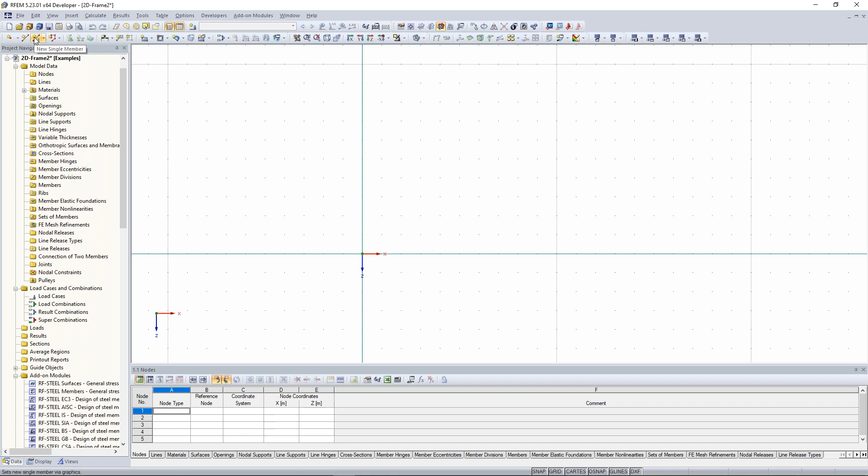First of all, I create my column. In order to create columns, you have to insert members. So I click here in the symbol bar, new single member. And because we haven't modeled or created one member yet, we have to create it again.

I click here, create new cross section for member start. It's useful to use this most common used cross-section here at this window, and we have to choose HEA profile. So in this case, this one. We click on that and choose here HEA profile 180.

We choose the right material. In this case, not S355, we want to have this in 235. So I have to modify this material. The best way to do that is to modify it directly, because then we've modified it and can use it the whole time.

So click here, edit material, and open here the material library. Choose here steel S235. It must not be at the standard group German, it can also be at the Eurocode - it has the same values, the same material properties, doesn't make a difference. So choose here steel S235.

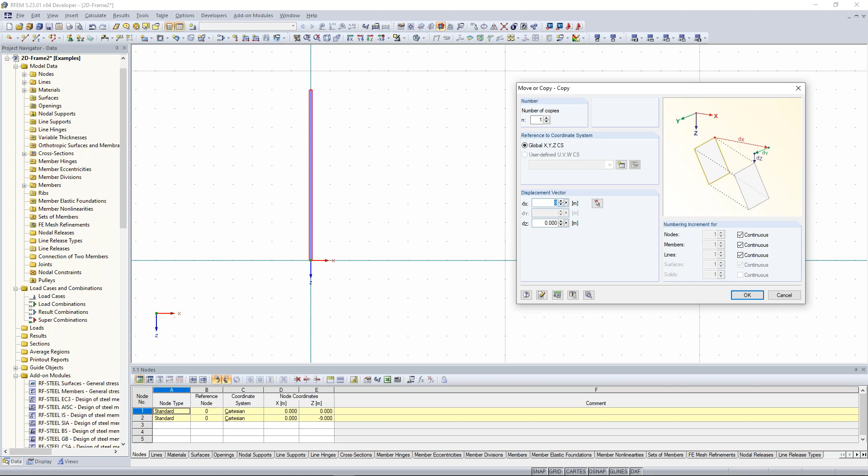Then right click, and now I want to show you the copy function. So I select this column here, right click, say move and copy, and the number of copies I set to at least more than 1 in order to copy that. My displacement vector is 9 meters - oh, 8 meters, sorry, now it's right. Okay, now I have 2 columns here.

Now the next thing is to create here the upper girder, the roof girder or roof beam. For that, I choose again new single member, and I create again a new profile, clicking here, creating new cross section. For that we need an IPE 270 profile.

So again, here we have these IPE profiles. If you don't find the wished profile, just open the cross-section library, for example here, and RFEM offers you a lot of different cross-sections. When you want to find the I-profile, click here, the I-sections, click on rolled and so on. I can do it this way, but also in the other way - now I'm here at this window, go here for IPE, and click here IPE 270.

If you want to see the different cross-section properties, the values, click here on the info button below cross-section, and now you see a lot of cross-section properties - shear area, cross-sectional area, also the moment of inertia you see, and so on.

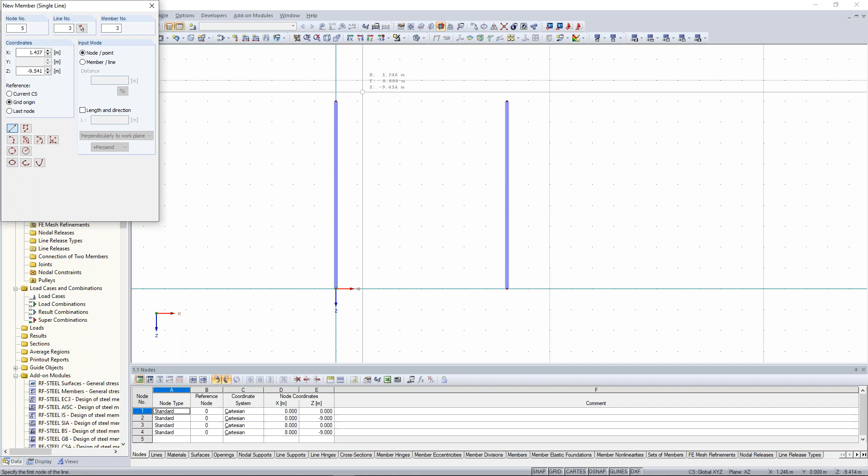Now, the next point is creating the slab beam here. We have also a slab beam or slab girder with another profile. First I want to create this cross section. I told you in the first online training that we have the possibility to create cross-section members, model data with the help of the data navigator, but also with the help of the tables.

Now I want to create the new cross-section with the help of the data navigator. I choose the data navigator, go to the area of cross-section, open this tree, and with a right click on cross-section, I say okay, new cross-section please. There I create a new cross-section, in this case again an IPE profile, but IPE 360. Click on OK, click again on OK, and now you see a new cross-section was added, and it's blue.

It has the color blue. What does it mean? When you have some model data here which is blue, this means that it isn't used in the model right now. But when we create a new member with that cross section, it will jump to black color because it is used for that model. You will see it.

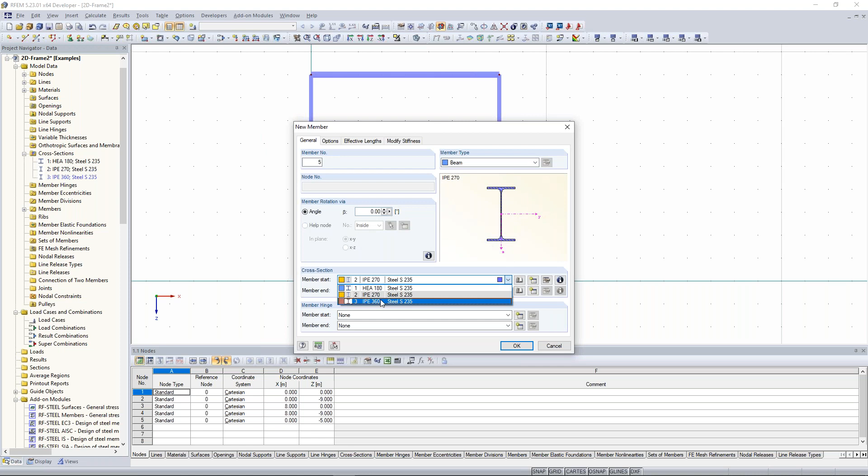Now I can easily create a new single member by clicking here at the symbol bar, new single member, and choose the right cross section I've created before. Click here IPE 360 and create that from that side to the other side.

Now we want to create again here a column. For that, I divide this member again. Click here, member number 5, and say divide member.

But this time we do it graphically. The big advantage of dividing graphically is that you can divide not just the member you clicked before, but also any other member. This is one advantage of dividing members graphically. Important is to choose the right steps, the delta steps. Now I go to this member here, which refers also to the member orientation, and here it's important that we divide this at the length of 4.5 meters.

So close this window. We have here this newly created node, and now we have the same cross-section column. I click here on that cross-section, on that column, and now I want to copy it by drag and drop.

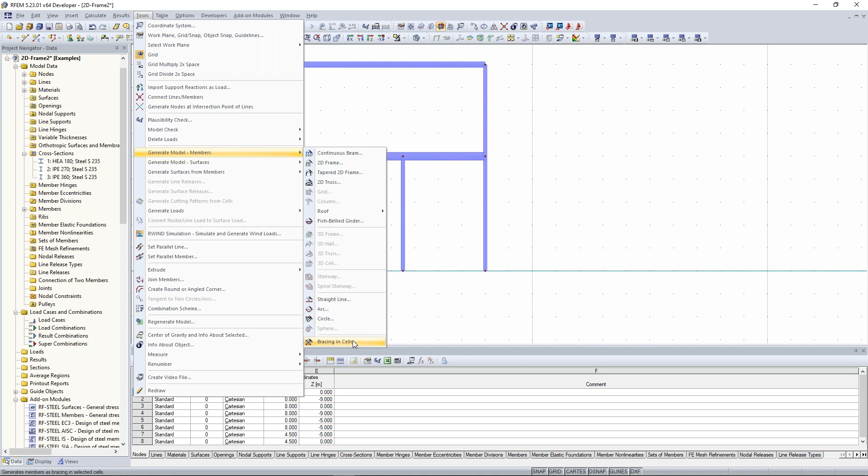Good, now almost done. Now we need here a bracing. We can do the bracings manually, or we use one of the functions of RFEM. You find many functions for creating or modeling something here in the menu bar. Under Tools, you find the function Generate Model Members, and at the bottom, Bracing in Cells. This is very useful for creating some models very fast.

In this case it's not so fast, but I want to show you this because you also have the possibility to create a lot of other things like continuous beams, 2D frames, and so on, or arcs, circles, and so on. But I decide to create a bracing in cell.

I click on that. Now, first of all, the bracing normally reacts just on tension. So if this member gets tension forces, it will react and transfer also the loads. But if the member gets compression forces, it will fail and this member wouldn't be calculated, and wouldn't have any impact on the structure. So it's important to choose the right member type, tension, and now also the right cross-section.

I create a new cross-section. We have a round steel here. Click on that, round steel.

And choose the right diameter, 20 millimeters. Click on OK. Click and again OK, and now we have the right cross-section.

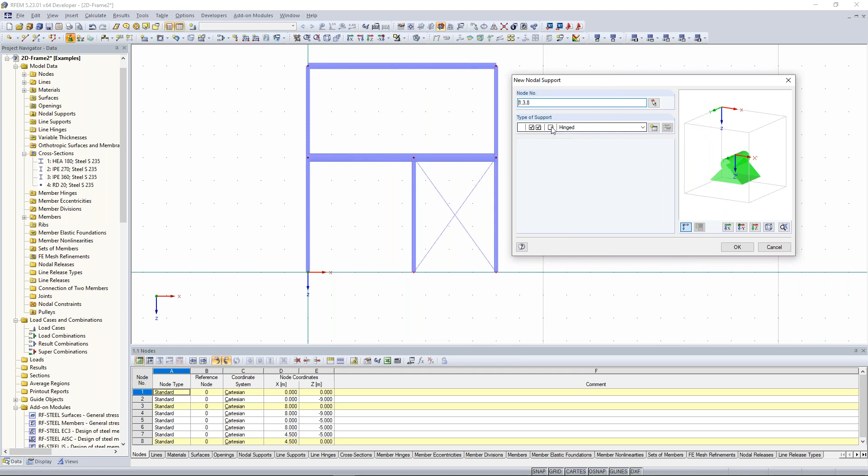Now we have to set our nodal supports. For that, I select these nodes here and say, okay, new nodal support. And because we are here at the 2D system, it's okay when we use here the hinged supports. I click on OK.

And finally, we have to do now our hinges because here I want a hinged joint, and the same way here also a hinged joint, and that column should be also a hinged column. So I have to create hinges, and for creating hinges I refer also to my data navigator. So I go here again to the data navigator and I say, okay, member hinges. I click here with the right click, member hinges, and say new member hinge.

And now this window opens, and let me explain to you what you have to do there. If you want to create a moment hinge, so no moments will be transferred to the other member, you have to activate here φY, so the hinge. If you want to create shear hinges or normal forces hinges, you have to activate the displacements here, UX and UZ.

So for that, we want to create a moment hinge. We have to activate here φY. You can do it also by clicking one of these shortcuts or icons here, set rotational release MY, and it has the same impact. For that I choose the φY, click on OK, and you see here now this member hinge was created, and it's again in blue, so it isn't set or it doesn't refer to any of these members.

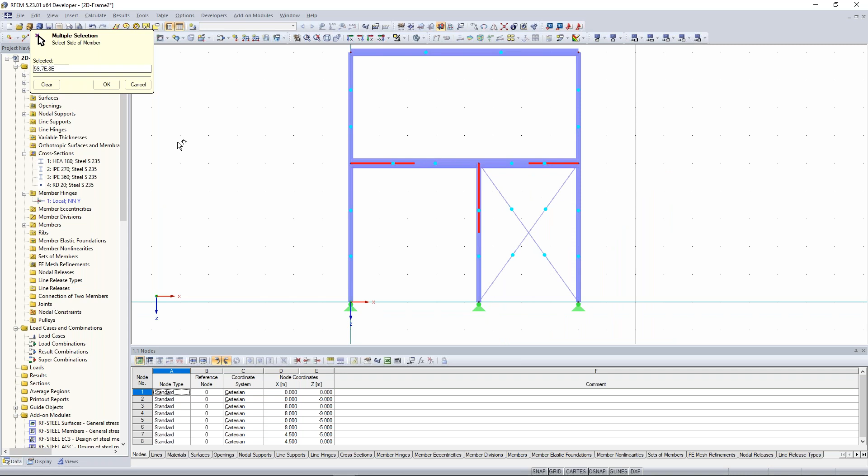I click on OK, and you see here these hinges. These are white points in my case, and these white nodes symbolize a hinge.

Good. Next thing. Daniel, sorry to interrupt. There are many people asking about the bracing, if you could show it again. Of course, no problem.

I create here on the left side on that cell the bracing again. So first of all, go here to Tools in the menu bar and say Generate Model Members. And at the bottom you find bracing in cells. And the reason maybe why you couldn't create this is because you didn't set the virtual line here. So you see now where the crosses are here. There it's possible to create a bracing.

Good. But here on the left bottom cell, you don't see the cross, and this is also the reason why we couldn't create there a cell. In order to do that, we have to create a virtual line in order to close this rectangle by members in order to get a cell.

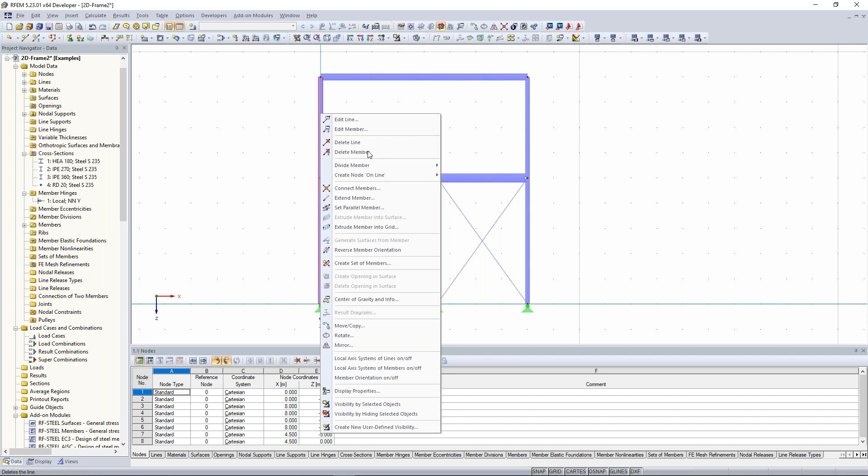And for that, I click on both members, add the upper member also to my selection by pressing the Control key. And then with the right click, I can say, okay, create set of members. And here I can give the name. In this case, I say the column should be continuous members. And I click on OK.

And when I change the display model a little bit to the wireframe model here in the symbol bar, you see here this set of members. And this is very helpful for adding loads there, for designing, for the interpretation of internal forces. I show you now the difference, because on the right side we have still these two members, and on the left side we have this set of members. And I leave it like that because I want to show you the differences.

Okay. So next point is the loading. So you add now some loads. In order to do that, we have to create a load case before. So click here on new load case at the symbol bar, and enter there a name. It's up to you. In my case, I choose the self-weight. I activate the self-weight. Click on OK. And now I add there some loads.

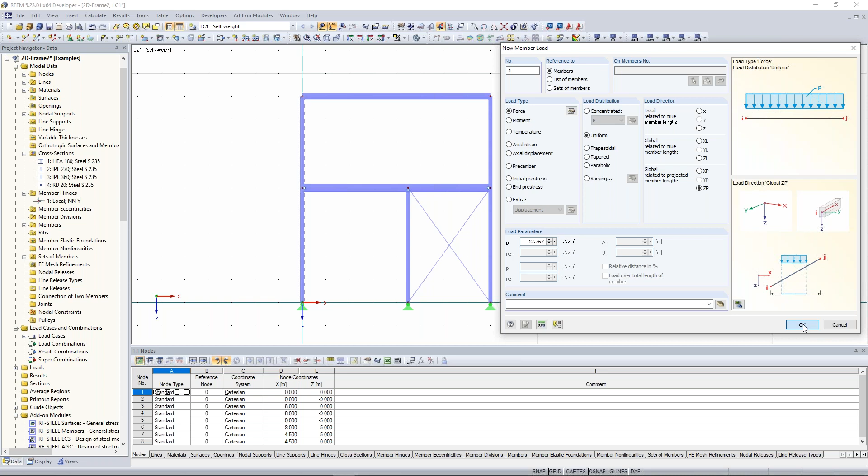I choose here this one and enter there a value of 12.767 kilonewton per meter. Click on OK, and I choose this girder here. Now I do the same for the slab beam here. Click again on these two members here, but they have the wrong value. So what can I do? I select this like that. And now you see, I have selected not only these columns, but also these bracings, nodes, and so on.

But that makes no difference for us because with the right click, I see the different selection options. And this is one big advantage of RFEM, that you can choose these model data or load data and edit them. So in that case, I choose these member loads, uniform, and say edit. And I change the load parameter from 12 to 68.371. I click on OK, and you see I just changed this member load and nothing else. Good.

Now I want to add some nodal forces. For that, I select these nodes at the top and say, okay, new nodal load. And because we selected these nodes before, you see here I have these nodes. I choose here a value of 40 kilonewton in the vertical direction. So I choose here PZ, click on OK.

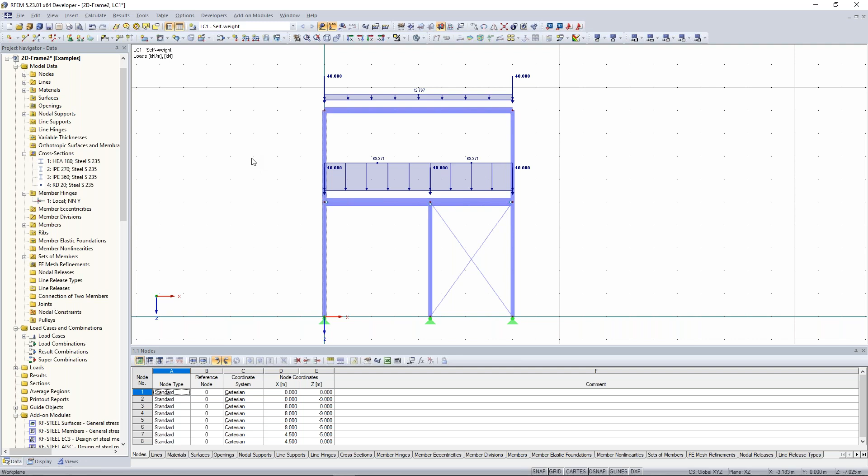And now I can easily copy these nodal forces also to the other level. So I click, for example, here at that node, and by copying via drag and drop, I can copy that very fast. So there are several options to insert these nodal loads. And now I select that again, right click again, and now not the member loads, but nodal loads, because I want to change the value. It's not 40 kilonewton, it's 2.4 kilonewton.

Okay, good. Next thing is the wind load or the horizontal load. And we created this set of members, so you can understand it as a combined member. And one thing is important: for sets of members, it isn't necessary to have the same cross-section. This set of members can have different cross-sections.

So when I want to create a set of members, it is possible to have a different cross-section here and a different cross-section here. So it's independent from that. Okay. Now see the difference. I create here again a new member load.

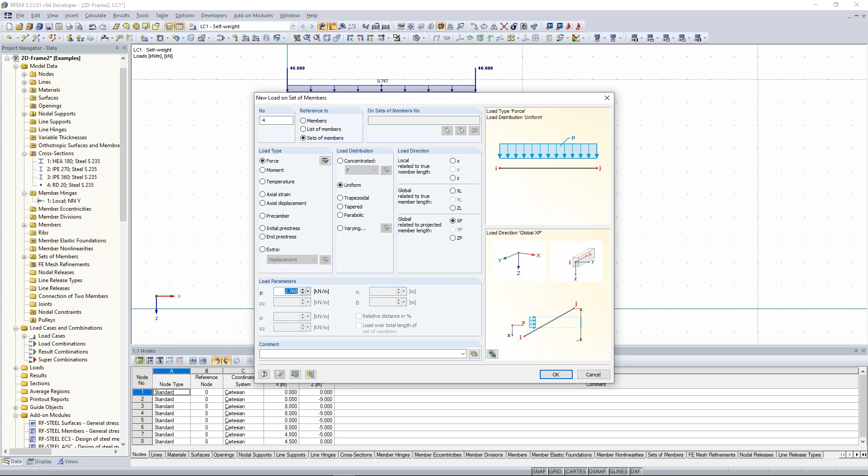But if I have here the set of members, adding this load will be an easier workflow because we are much faster. So click here, sets of members, change the value to 2.7. And now see, just by clicking one of these sets of members, I created the whole load along this column. This is very helpful and useful, because sets of members offer you more advantages, like adding loads, also when you design something.

And now we can also see it in the view of internal forces. Okay, now we added everything and we can calculate it. So you can click here, calculate all, or click here, show results. And first of all, we see here the deformation.

If we want to display the deformation in a nicer way, go to the display navigator, go down to the results, to the area of deformation, members, and choose that the cross section should have a colored deformation, and you see it like here. You can maybe also deactivate the isobands, the separation lines, and now it looks a little bit nicer. This is one tip, one of my secrets to show it a little bit nicer.

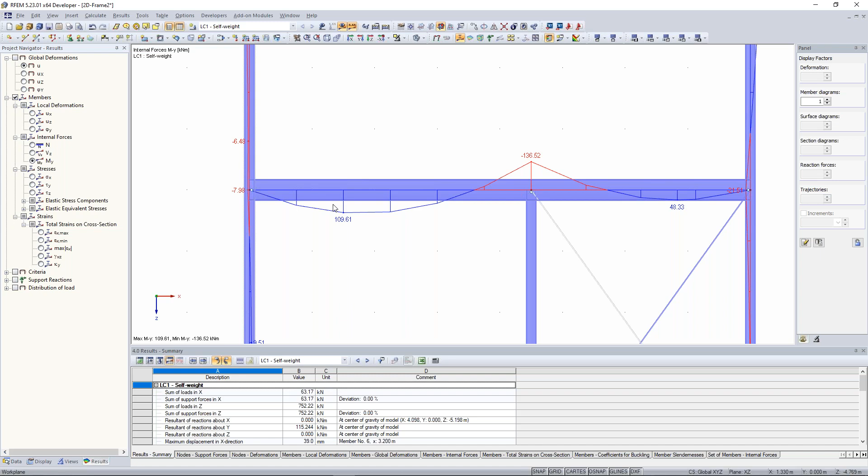And then let's go to the internal forces. For that, we have to activate the members here. What I want to show you first is the bending moments. I think that's pretty clear, because there we have a hinged joint, so there shouldn't be any bending moment. When we look at the normal forces, it's also pretty clear that we have some normal forces in the columns. And now look at the bracing here. Why don't we see any normal force at this member?

Because when we look back at the deformation, we see it is in the global X direction, so we have horizontal deformation. This bracing member becomes longer, so it will get tension forces, and this member will get compression forces because it becomes shorter. And when a tension member gets compression forces, it fails and will not be considered in the calculation. That's the reason why there isn't any value of internal forces.

And here we see this member has positive values; positive normal forces are tension forces. I think that should be clear now. Okay, again, one important point is the member type. I double click on one member, and we have here different member types. The member type beam is the standard member type for creating these structures. It can transfer all internal forces: normal forces, shear forces, and also bending moments. So it's a bending resistant beam.

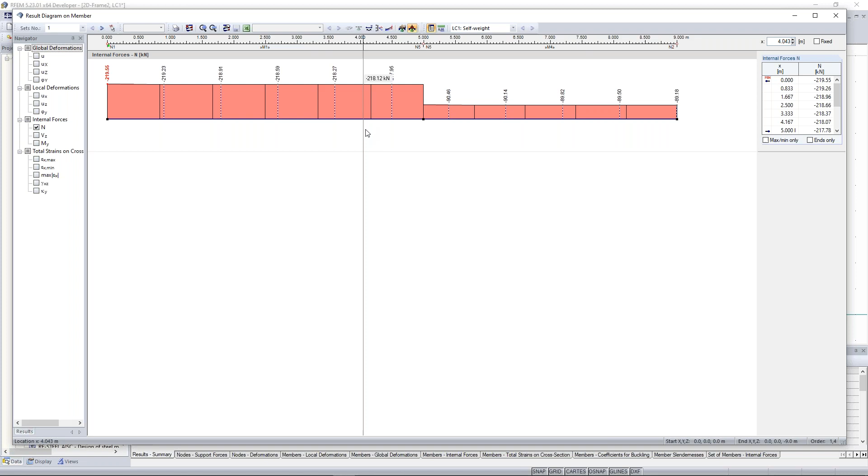This is very helpful, very useful, because when I want to have the same on the right side of my structure, I have to click every single member and then right click and say, okay, now result diagram. And now I have the same effect, the same situation, but I have to click every single member in order to have the same situation like on the left side, where I just click this set of members and say result diagram.

Okay, I think that we have everything concerning this. And now I would say we have time for questions. Praxitalis, are there any questions? Only one, Daniel. Someone is asking what's the difference between truss and truss only N, only normal forces, in the member type option.

Okay, I can show you the difference. First of all, I show you with the help of the cables. I think that's the best way to do that. So look, the bracing has the member type tension, but you have also the possibility to have truss and truss only normal forces. A truss can have along its member bending moments, but only at the ends there are no bending moments.

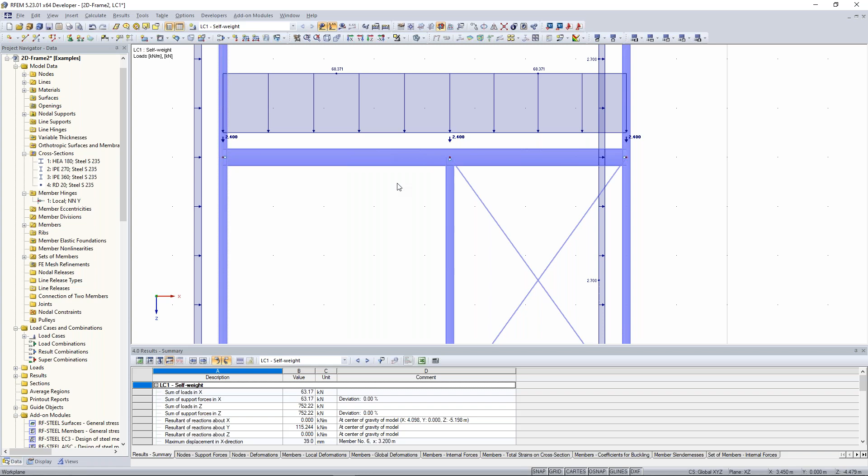So when you look, I create here a rigid joint, so I delete this member hinge, but I create here a single beam with hinge joints. So in order to create that, I create here at the member end again a hinge, and now it's a single beam. You have no bending moments there. You will see it now for this member, just for this member. Look to the bending moments, and I think that field moment is very clear.

At both ends we have hinges, and that's also the reason why we get there no negative bending moments. And the same situation you can create also with the member type truss. With the member type truss, the adding of member hinges is blocked, because at both ends you have hinges. Now look to the internal forces of the bending moments. Same situation, same effect. I think that's also clear.

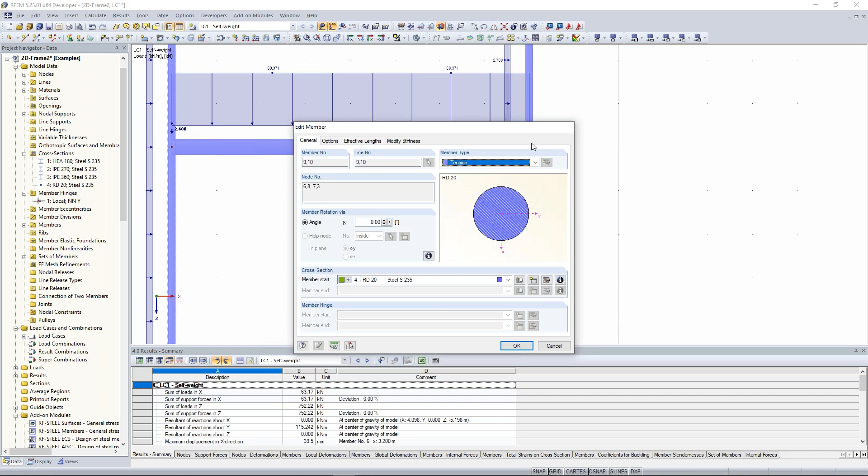And now I want to show you with the truss. So for that, I choose here these two bracings, say edit, and truss only normal forces. Now I think the better way to show you is when I activate this at the columns. So look to the bending moments, and when you look to the columns, you see there are some bending moments. And when you want to just transfer normal forces, only normal forces, click on that column, create here truss only normal forces.

So the program will calculate that column so that it will get just normal forces. But these forces can be positive and negative, so you can get compression or tension forces, but nothing else. I calculate it. And you see no bending moments. At the calculation before we had some bending moments, but now there are only normal forces. And this is the difference concerning these member types. Okay. Another question?

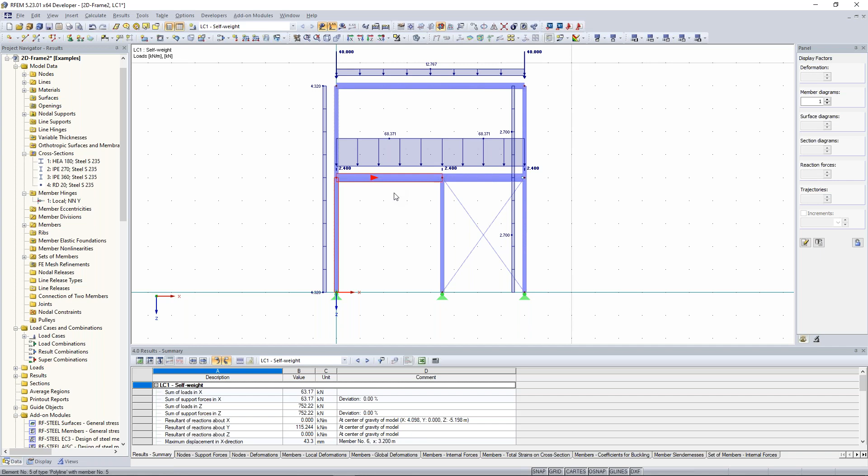Can you please explain how we can calculate the buckling length when making the unit checks using a stability module? Yeah. So this is the next thing, making a buckling analysis. So for that, I change these again to normal beam here. Change this beam again to the beam, and the member start a hinge. Okay, now we have the situation before, and now we can do the buckling analysis.

So for that, I click here at RF-STABILITY. I consider 4 eigenvalues, so 4 buckling cases. I refer to my self-weight load case. I just have to activate my division for straight members, at least 10. So the minimum number of member divisions should be 10. It's up to you, but more than 2 definitely. And the other settings, you can leave like that. Calculate it.

And now you see the critical load factors, so the factor by which you have to multiply the whole loading in order to get an instability. But we want to show the eigenvectors. And here we see it. Normally the first eigenvector should be there, but I can say why this eigenvector is like that. Because there is a column, and this is a rigid joint here because we have no hinge.

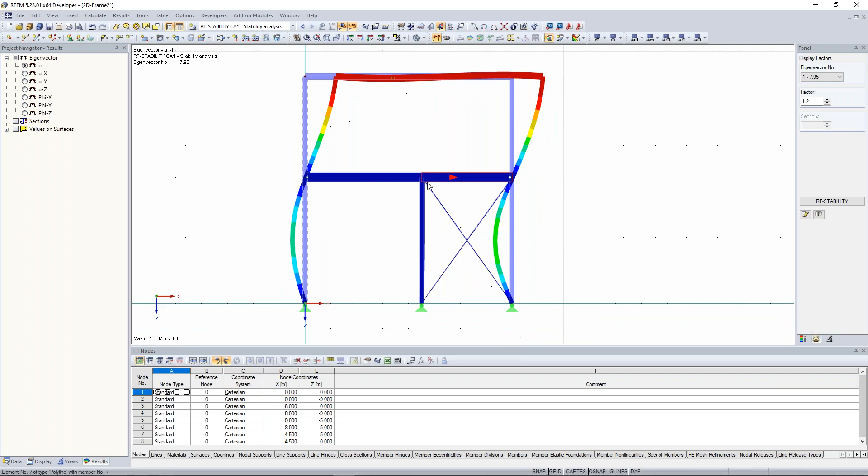I change this now, I make here a hinge, and now keep that eigenvector as first buckling case in mind. I create here, wait a moment, here a hinge, and calculate everything again.

And now it's better. So the first buckling case here is this column. So we have here the second Euler case. And this is a local buckling case or a local failing, because you see, okay, just this column will fail at the eigenvector or the critical load factor of 5.81. And then the second will be a global failing.

And to look at the buckling lengths or critical lengths, effective lengths, click here. And here you see the critical lengths of this. And when we look maybe at member number 8, there we should have a member length of the same length like this one. Look here, member number 8.

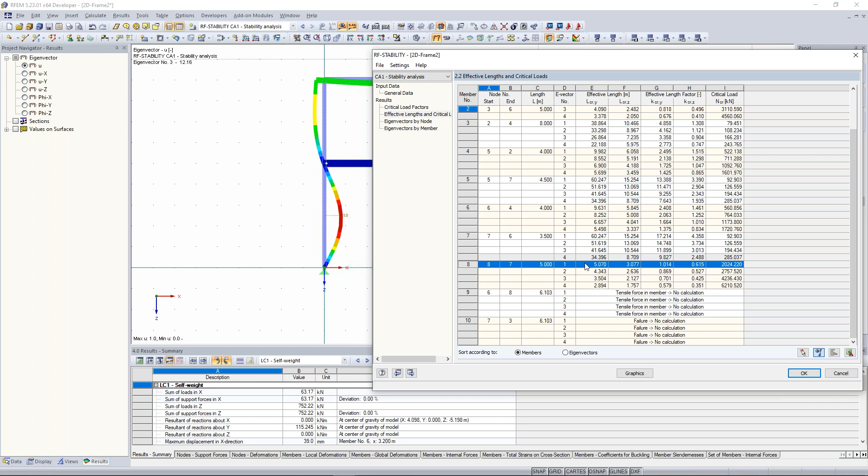We have here for the first eigenvector the effective length factor 1, and this is also similar to the Euler case 2, and this length will be multiplied by the normal length here, and we get a value of 5.07 meters. This is the effective length, so the buckling length. Okay, good.

Next question. Is there a way to determine what is the right cross-section of a member through the RFEM software? How you can choose sizes, etc. So as far as I understand, this question is about the design practically. Yeah, I think so too. So you want to prove if this cross-section is enough for the whole loading. In order to do that, you have to do some designs, and we can do a simple design, for example.

We make a very easy design. We make a stress design here at that beam. So look at the results, look at the bending moments. So we have here these normal forces, this bending moment, and so on. We make a very easy design. For that, you have to use one of our add-on modules.

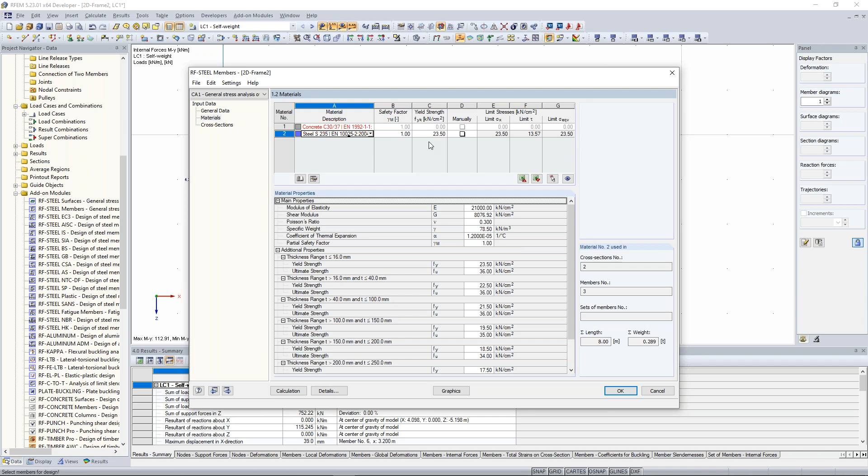I refer to that member here. Click on OK. Choose this load case here. Now I can check here the right material and the cross section. And here you have the possibility after the calculation also to optimize the cross section. And I have here this cross section IPE 270. I calculate it, and you will see the stress ratio is okay.

So we have a value here of 0.64, and that's okay. So I can go back to cross section, the maximum design ratio is 0.64, and I can optimize it. So the cross section will be optimized, therefore the optimized section from the table will be used. So we can get a smaller IPE profile.

Click again on calculation. Now we have another stress ratio. It's much more than before because it refers to the optimized cross section, and in this case it's the IPE 240 profile. And this is maybe a way to optimize or to get the right cross section for that case. Okay.

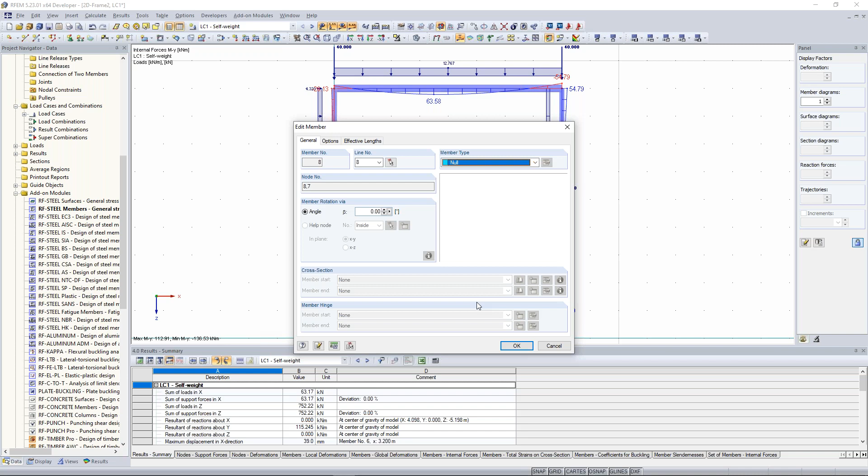Another question, maybe the last question of this chapter. What are null members? Null elements, sorry. These null elements are members without any rigidity, so without any stiffness. It's just for when you want to model something in an easier way, and when you don't want to have any impact on the calculation, you can use these members.

So for example, I can create here this null type. This beam will look like that. And then I would, for example, have a closed cell. This is maybe one option. Or when you want to add a surface load on members and you want to cover the whole rectangle, you can use these null members.

So the null members are maybe one way to model something when you don't want to have any impact on the structure. These member types don't have any stiffness, just for easier modeling. Okay.

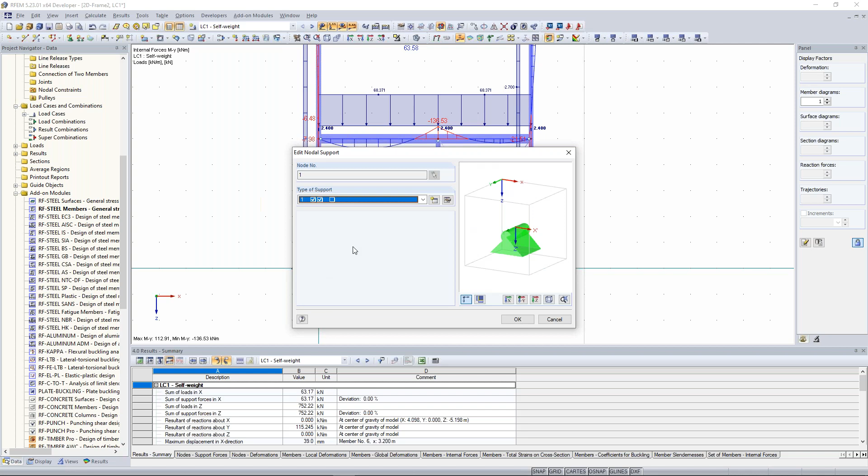I can show it here again. So I click here on one of these supports. When I added this type of nodal support, you see here some displacement and some resistance. So here the supports and the restraints are greyed out, and that's because we are using this 2D system, and that's why some deformation and rotations are partially blocked. Good.

So last question of this chapter is this one. Okay, good, I close this window and show you the results. What are sets of members? They must be understood as combined members, because the set of members doesn't depend on the same cross-section. So you can have different cross-sections and still use that as a set of members.

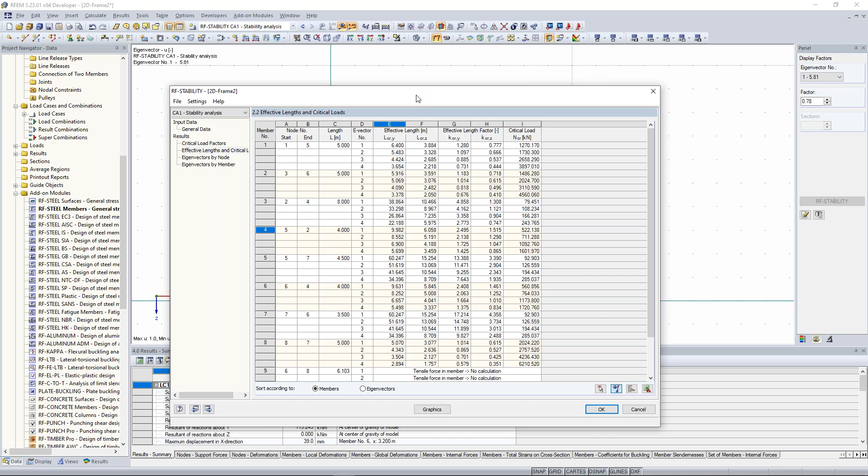Almost 10 meters, yeah, and this is important. Sorry, not 10 meters, because you also have to refer to the right eigenvalue, eigenvector, and this is the second form - for that you would have to use the second form here. So member 4, eigenvector number 2, and there you would have this effective length of 8.5 meters.

And the effective length isn't the same as the buckling - okay sorry, the effective length is the same, yes, of course. The buckling length is the same as the effective length. There are several expressions for that - effective length is the same as the buckling length.

Okay, good. Now we jump to our next project. For that, we create again a new model. Enter the name, concrete model, and refer to a 3D model. I choose the right project name and save it to the right folder - it's up to you where you save it.

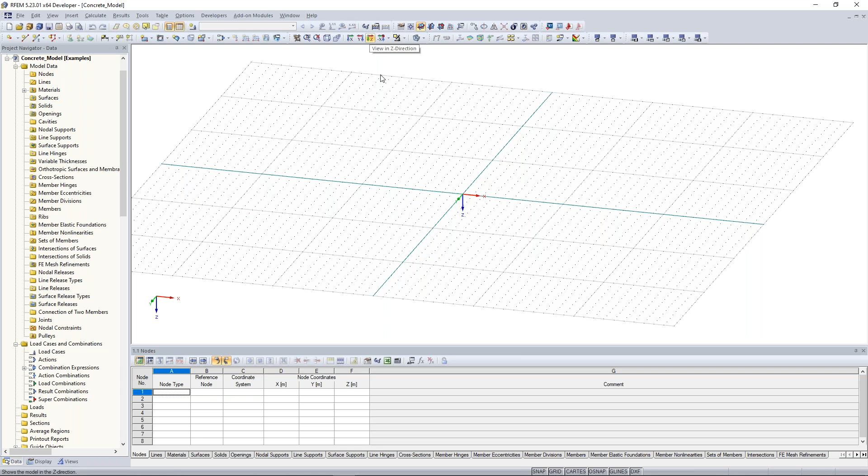In order to enter or insert the nodes very easily, I would recommend you now to use the tables, okay? So I jump back to the view in Z direction in order to have my window like that.

Now I insert several nodes via the tables. It's very easy when you have the coordinates in order to do that. Just click here at nodes, click on one cell, refer to the origin point, then jump from one cell to the other with the tab key on your keyboard, and enter for X for the first node 0, 0, 0. Then click enter, and it will jump to the next row to create the next node. For that we create 14, 0, 0.

Next node will be 0, minus 12, 0. And the other node will be 14, minus 12, 0. Now we have these 4 nodes, and with the help of them we can easily create one rectangular surface. Now, one last node I create. This will have the coordinates 0.5, minus 0.5, and 0.

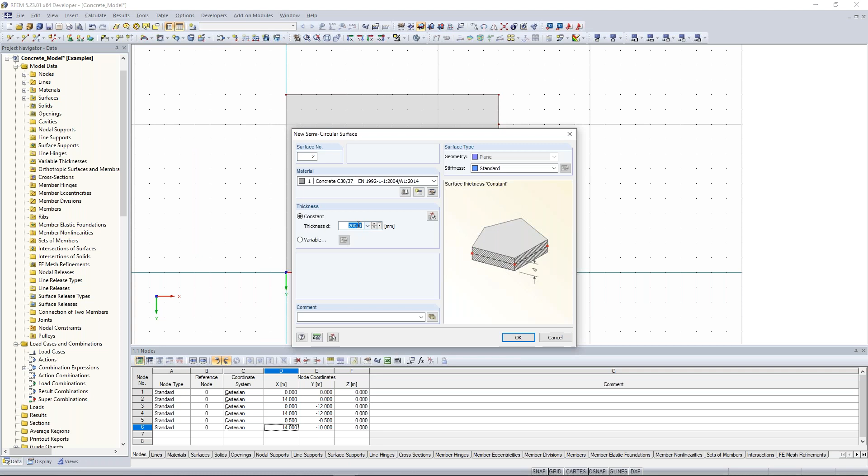Now the next step is that we create this semicircular surface. For that, go to the new rectangular surface, click on the arrow, then you have a choice of several forms of surfaces. Here, choose semicircle. Choose also the right thickness, click on OK, click on the radius, and go 2 meters down. And voila, we have this semicircular surface.

For the next things, we need to copy this node several times along this axis, and also copy it a little bit upwards. Click on that node, right click on move and copy, and say the number of copies should be 2 with a displacement vector of 5. Click on OK. And the last node I want to copy again, but in this case only once, with the displacement vector of 3.

Now I want to copy these nodes again against the global Y direction, so I select every node. Important that you draw your selection window from the left to the right lower corner. Right click, say move and copy again. In this case also number of copies should be 1, and this displacement vector is minus 4.5. Now you select the third node from the left side, again move and copy, and there it should be 4 meters, minus 4.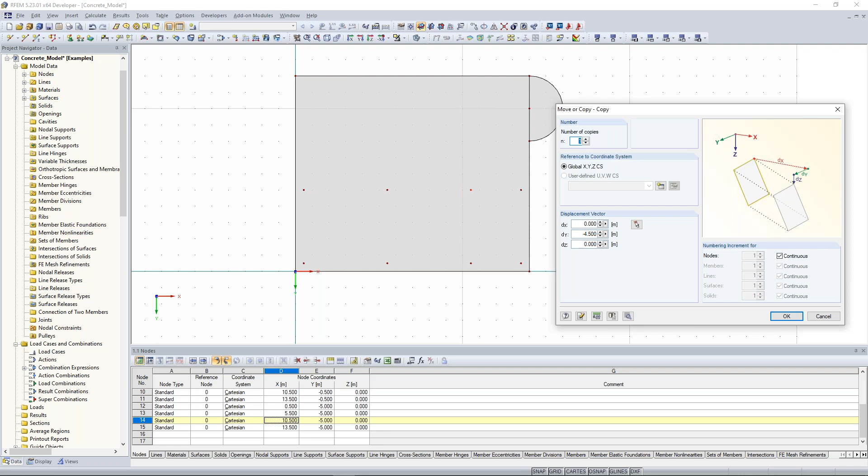Now we want to copy everything to the next level. So we draw a selection window over the whole structure, right click, say move and copy. Now number of copies should be 1, and against the positive Z direction, because we want to copy it to the next level, click here, enter the value of minus 3.25 meter. And now rotate your window with the help of the control key on your keyboard and your mouse wheel a little bit, and you have it like that.

Next point is creating the opening. So again, I show you the floor plan. Here we have an opening, here we have an opening, and I want to create it now. Keep in mind that creating an opening over two surfaces is not possible, so you can just create openings in one surface. For that, we have to delete these two surfaces. Click here on that line, click delete on your keyboard, or right click delete line, and the whole surface disappears.

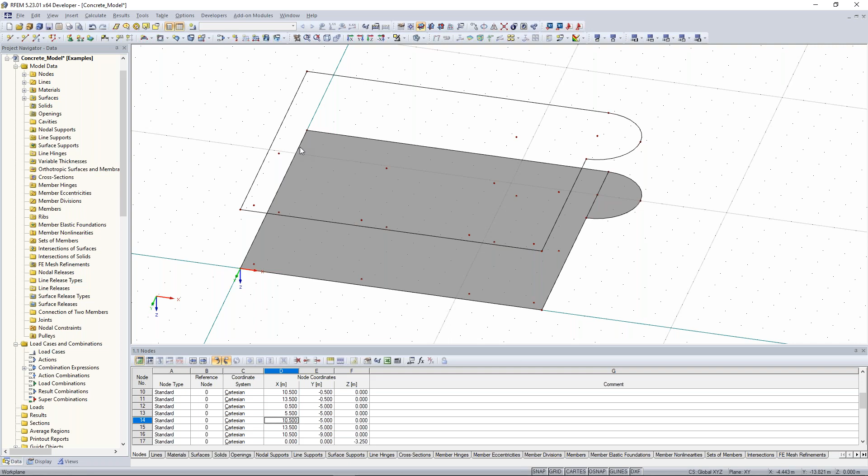But in order to create now one surface at once, we have the possibility again to create a surface with the help of the boundary lines. Select boundary lines, set the thickness to 300 millimeters, and click on one of these lines, and the concrete slab is generated.

Okay good, now we can create this opening very easily. Next to the creation or inserting of surfaces, you find the openings. Click here with the help of the arrow to circle, and click here to the middle point, and enter there a value of the radius of 1.8 meters. Click on apply, and then you have this opening here.

Okay good. The next step is creating the walls. The walls are also surfaces, and you can create a surface in RFEM when you have at least 3 lines, 3 boundary lines. So how can I do that?

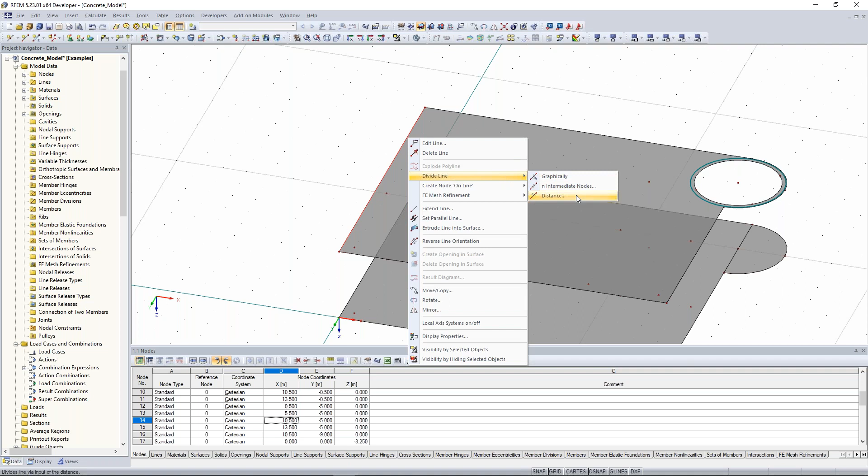So I click on one of these lines, in this case on the line on the left side. Right click and say divide line, in this case by distance. Now I look to my line orientation, and in this case it shows me from the top to the bottom. So I want to have it at the length of 3.5 meters, so the line start should be 3.5 meters. I click OK, and this node was generated.

And I do the same thing for the other lines here. I click on that line, right click on divide line, say also by distance, and now I refer to the line end. Here I enter the value of 5.5. Click OK.

And the same thing again with this line here. Right click, divide line, distance, line end is 3.5 meters. Okay good, and lastly this line here. Right click, divide line by distance, and here I divide the line at the end, 2 meters.

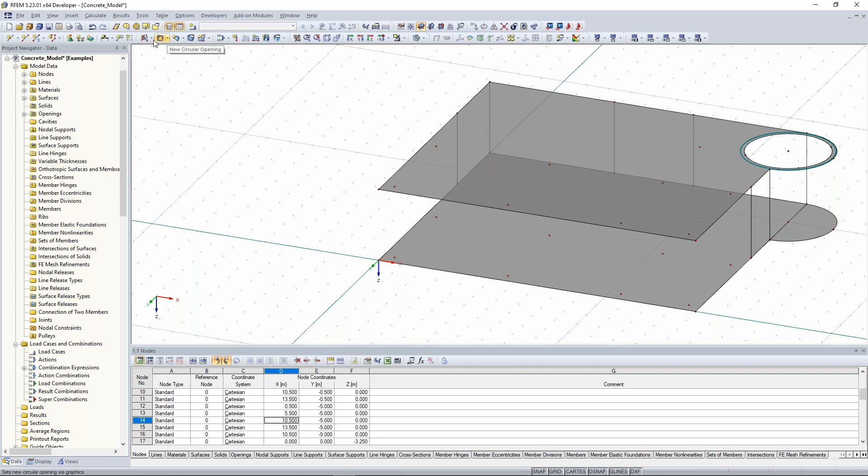Okay good, now I can create the walls. To do that, go here to the creation of rectangles, select boundary lines, enter there a value for the walls of 200 millimeters, and click these boundary lines. I think that's pretty clear.

The reason why I don't do any wall there is that at curved lines, plane surfaces aren't possible to create. So for that, you have to use another way to create a surface, because what we were doing until now was creating plane surfaces, and that's everything possible with that. But now you see here we have a semicircular surface, a curved line. For that we have to use something different, we have to use quadrangle.

You find it here in the symbol bar, quadrangle, and that's a general 4-sided surface. Click on that, also decide here for the thickness of 200 millimeters, and click these boundary lines.

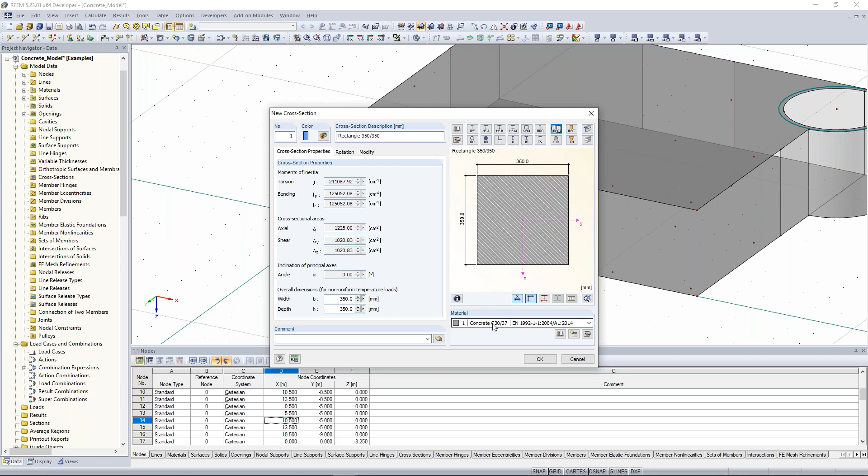Decide here for this rectangle concrete cross-section, and we have a quadratic cross-section of 350 to 350 millimeters. Click OK, and because we were referring to this concrete cross-section, the material was also set to concrete C30/37. Click OK again, and draw this member from the lower node to the upper node, and with the right click, close this insert window.

So now I want to show you again something very nice, the copy function via drag and drop. Select this member here, press the Control key, and move it from one node to the other node. I think that's pretty clear. Now rotate your window so that you can select all 4 columns by drawing the selection window from the right to the left side.

And now all columns were selected. And now press the Control key again, and you can copy it easily to the next node, to the next plane here. And then this node here, we want to create there again a column, create this here.

Okay. Now I have missed something. I have to add there an additional wall. So for that, I select this outer surface here, this outer wall. Again, press the Control key and copy it from there to there. Okay, good. I think we finished this chapter.

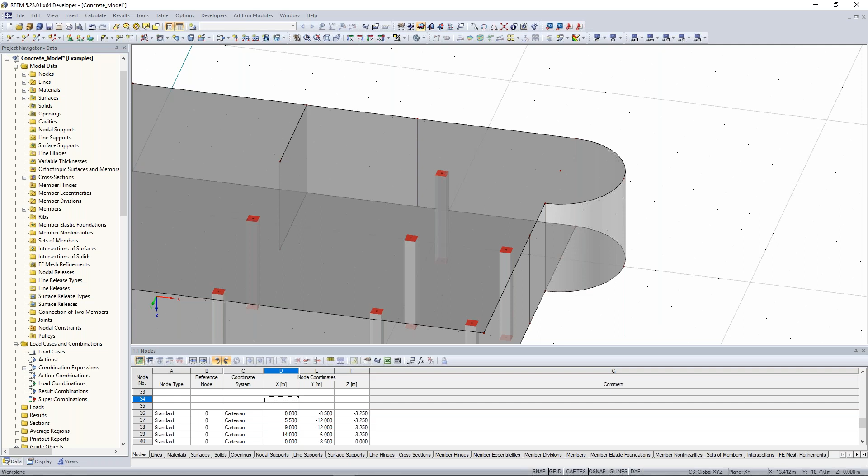So, okay, so I delete this opening. I delete also this line here. And as I said before, in order to create an opening, you have to do that at one surface. And before we had 2 surfaces, so I created here the whole surface. Now go to the symbol bar, click here on New Circular Opening. You find it here when you click on the arrow. Click here, Circle, and click here on the middle point.

And now you have the possibility to do it graphically, but because you are working with the wrong work plane, it will not be so easy to do that. So just enter the value of 1.8 meters, click the key Enter, and the opening was created.

Yeah? Okay, next question maybe. Okay, I think that was everything. You can carry on. That was everything? Okay. Yeah. We will have time at the end to answer maybe questions.

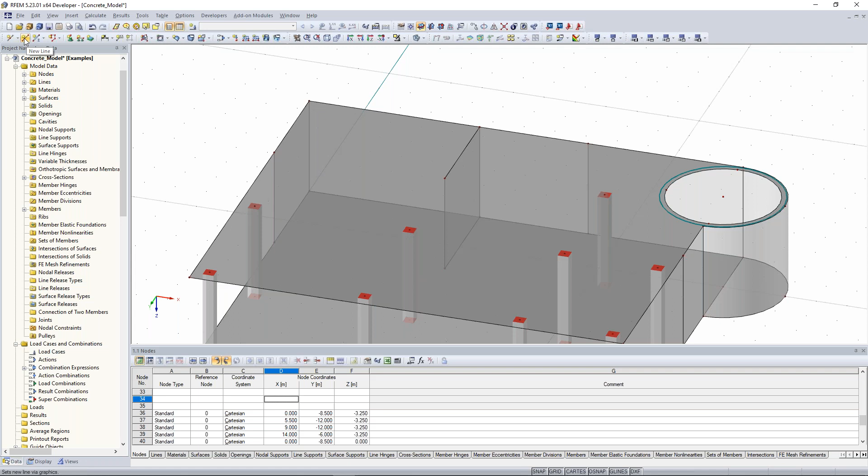So for that, we create here a new line in order to create our downstand beam. So I click here on new line, click from that node to that node and again to the column here. And now maybe you see this isn't a straight line. It's a little bit inclined. You see it here. And this is a mistake. I want to have here a straight line. So I can select everything on that node and move it to the same level here.

In order to do that, please press the Alt key on your keyboard, because when you want to select this within this surface here, it would not be possible because you would select also the surface. For that, please press the Alt key and draw a selection window from the left to the right side. Now when you rotate the whole thing, you see I selected the column, the member, and also the nodes.

And then say move and copy. And now say, select 2 points and define the displacement vector. Click on that node and on that node. And you see, we have a displacement vector of -5 in delta x and then also in delta y. But delta x, we don't want to have this, just in delta y. Click on OK.

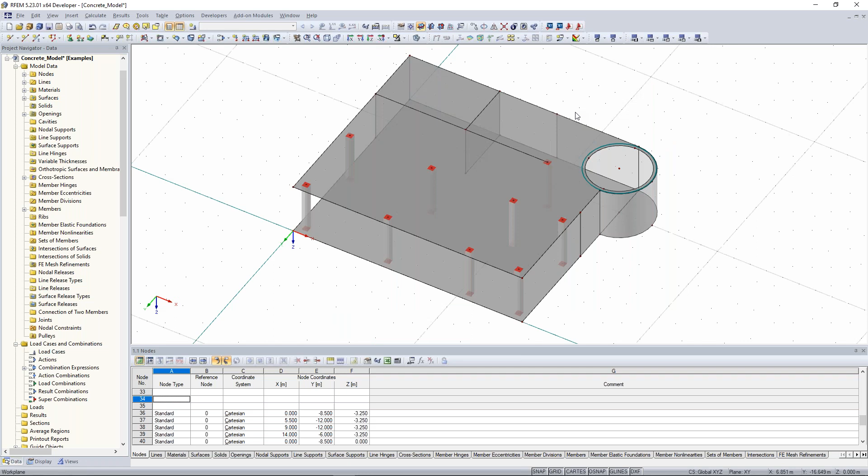And now I made the mistake that I copied it and not moved it. So I undo that by pressing Control and Z. Do that again. Move and copy and set the number of copies to 0. And now I have it right. Okay. Good. Sorry for that. But maybe it was a nice way to show you how you can change something afterwards.

Next thing is create the downstand beam. For that, please select this line, add to your selection also the next line with the help of the pressed Control key. Right click, say edit line. You see now here the line numbers we selected, go to the member tab and say member should be available. Okay. Now we create a new cross section, the cross section of the downstand beam.

Click here on rectangle. And we have a width of 200 millimeters and a height of 150 millimeters. Click on OK. Yeah, looks like that. Click on OK.

And now I think one of the most important things is when creating downstand beams or T-beams, please, really, please use the member type rib. Okay? So if you learn at least just one thing from this training, it should be that you use the member type rib for downstand beams. Okay? Go there, edit this member type,

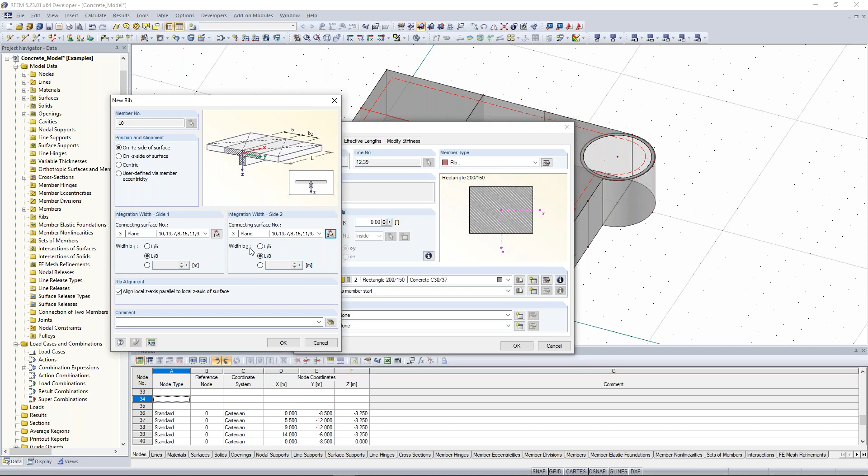I click on OK, again on OK. And now you see here this downstand beam. And you see there's an eccentricity, there's a joint, and you don't have to do that. I just want to show you: go to the display navigator, go to rendering, click here on model, solid model, surfaces, and choose filled, including edges.

You see it here. So the lower edge of the surface equals the upper edge of this downstand beam. So everything is right. It's also realistic. And this is one important thing to know when you create downstand beams.

Okay. Next thing is the creation of an opening in another work plane. I want to create an opening in this surface, this wall, because we want to create a window. You have to change your work plane, because now it isn't so easy to create an opening there, because you don't have the right work plane to refer to, so you have to change your origin.

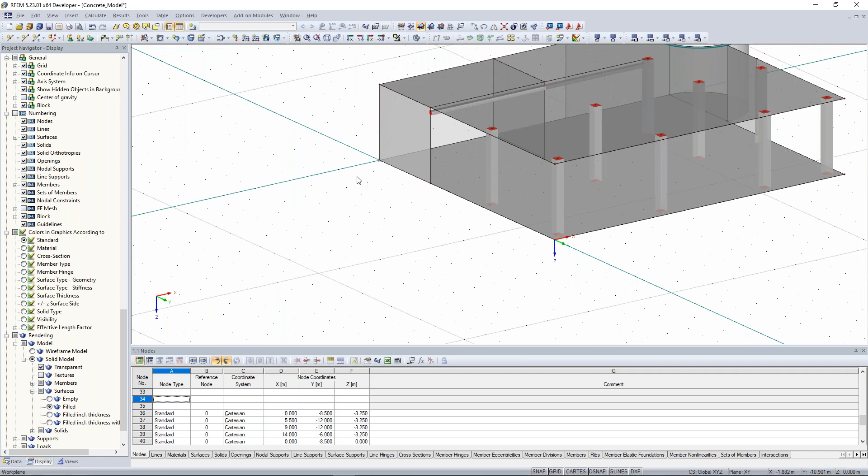So in order to do that, click here on Set Origin of Grid/Work Plane. Click on that and choose this corner node here, because then we are in the right work plane. We can change the work plane to XZ, so go here and choose work plane XZ. And now it's easier to create a window or an opening there.

Okay, so for that, you can use rectangle here, and now it's easier to create different openings there. But you see the grid points aren't so easy to snap to, and they are not at the right coordinates. So for that, I create my nodes. So I go here, click on data, click here on nodes, say create new node.

And now it's important that I refer to that point. Sorry, this was the wrong insertion of nodes. I think the best way to do that is go here to the toolbar, click on new node, and there refer to the Cartesian coordinate system.

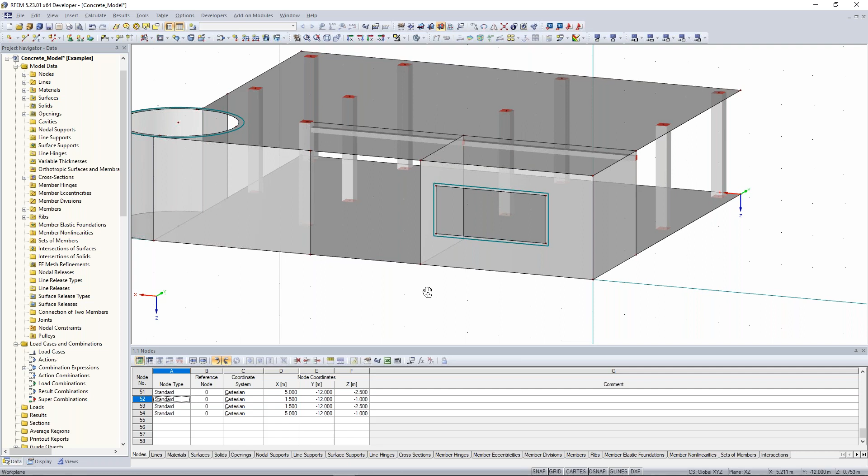And now you can easily create this opening. Click here on new rectangular opening, click on those two nodes, and you can easily create your window or your opening. This is one point you have to keep in mind. When you want to modify, edit, change, or create something on another plane, you have to change your origin of grid and work plane. Good. I change it back to my beginning situation.

Yeah, and now we have maybe again some time to answer some questions. Dr. Stellis, do you have some questions? No questions yet, Anil. Okay. So I go ahead.

So, good. I create now my surface supports, okay? Because we need some surface supports in order to hold this complete structure, and also some line supports in order to hold here these lines, because there we want to have a continuous foundation. Okay, first of all, the line support. For that, I choose the wished lines and say, okay, new line support.

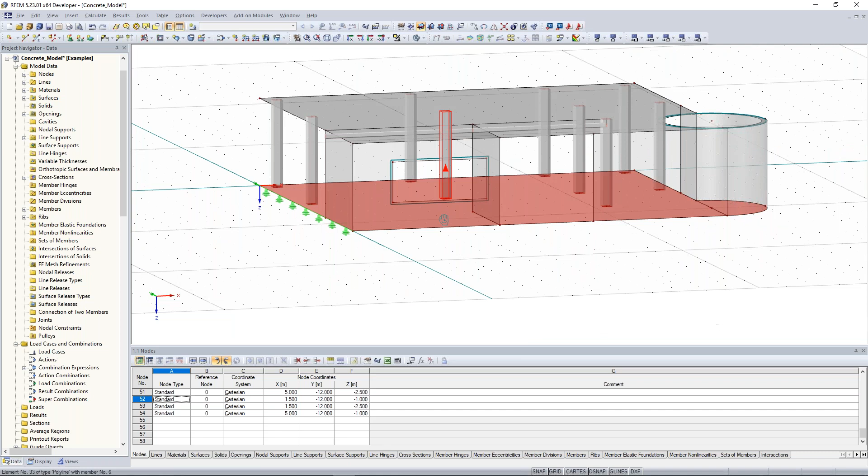For that, I rotate my window a little bit in order to select these surfaces here. So I click on that surface. I press the Control key and add to my selection this surface. Now, with the right click on that surface, I can say, okay, edit surface, go to the tab support and eccentricity, and say the support should be available.

And there we change, first of all, the units and decimal places, because we are referring to meganewton per meter to the power of 3. So click here on units and decimal places and enter there at support stiffness orthotropy the forces meganewton. Click on OK. These units will change. And now it's easier to enter the values, not so big.

So there are these kind of spring constants, 10, 10, 100. And for the shear, we have 50 and 50. We want to consider one non-linearity. In this case, the whole surfaces should fail if the contact stress in the Z direction is negative. So if it gets tension forces, no tension forces. So this option corresponds to failure under tension. Yeah, this is right. So if the slab is lifting, no more support is provided. Okay, this would mean this option here.

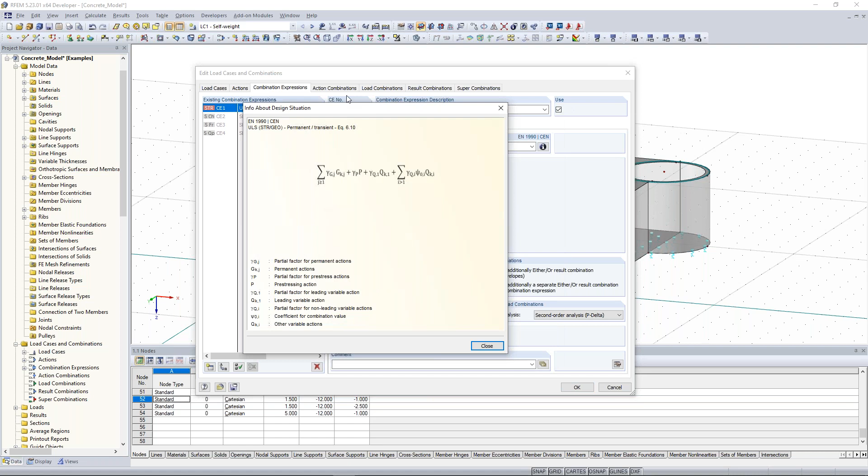So when I jump back to this ultimate limit state, I can see here the design situation. When I click on the Info button, I see the design situation and how load cases will be combined. So here, first of all, of course, these partial factors. Then here again, some partial factors. And when I have more than 2 load cases with different actings, I also have to consider this combination factor, the coefficient for combination value. This psi and this gamma here. The gamma is the partial factor and this psi is the coefficient for combination value.

Okay, I close this window. What I want to consider is the imperfection load cases. I have here these imperfection load cases, and I want them to be considered only with the right wind load cases. For that, I say, okay, all imperfection load cases as alternative. So no imperfections would combine with each other. They exclude each other, but I subject them to specific load cases.

I don't want the imperfection towards the positive x direction to be combined with the wind in the positive y direction, because this would be a little bit favorable for the whole calculation. And I know the most unfavorable situation will be if the imperfection towards the positive x direction is combined with the wind in the positive x direction. So I exclude them. The same I do for the positive x direction when I have the load case imperfection towards positive y.

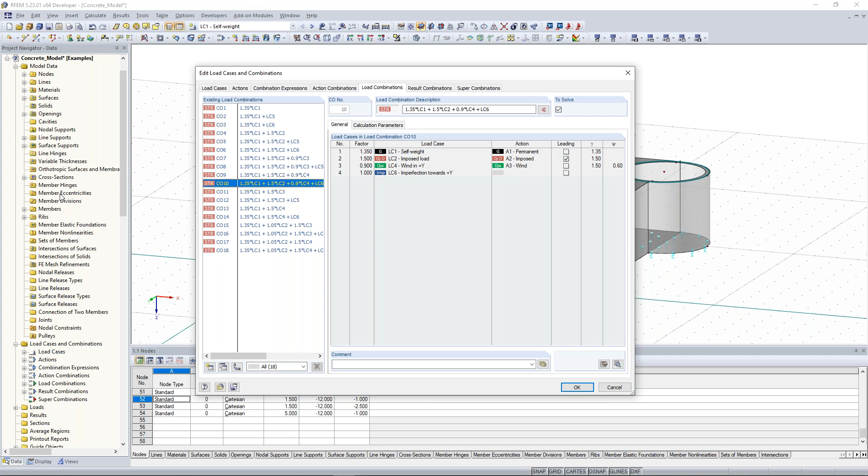Okay. Now I jump to the load combination. What is a load combination? A load combination is a combination of all load cases taking into consideration these partial factors and combination factors. We combine these load cases into one bigger load case. So when we jump to load combination 10, we see load case 1, load case 2, load case 4, and also load case 6, and here also the different partial factors and combination factors.

Okay. And then I jump to the result combinations. What is the difference between load combinations and result combinations? The result combination is a combination of all results as an enveloping result. So you can see the maximum and the minimum of internal forces or results in general. In a result combination, the maximum and minimum values of internal forces, deformations, support reactions, and so on are determined.

This is one big advantage, because here you have 18 different load combinations and you want to see the most unfavorable results. For that, the result combinations are very useful because they consider all load combinations and all their results. And there you can see the maximum and minimum of the results. Okay, good. So much for load cases, load combinations, and result combinations.

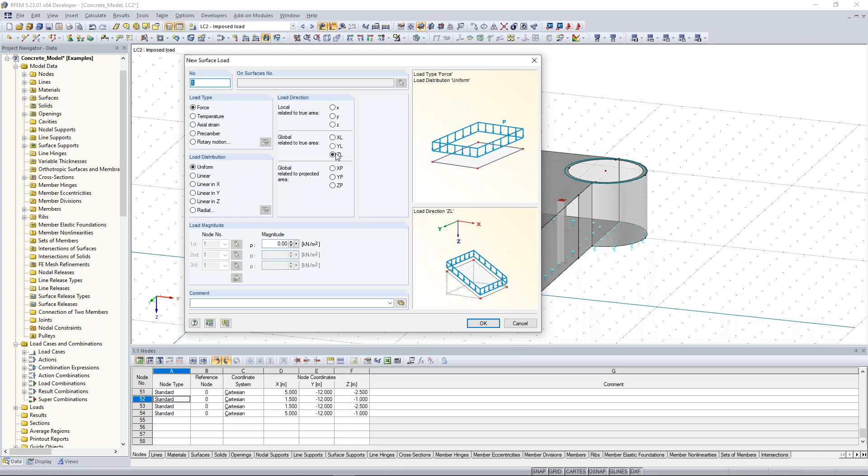For that, I go here and say create new surface load. I relate to my true area; the magnitude of my surface at the bottom is 5 kilonewton per square meter. I click OK. I made a mistake, unfortunately. Again, I click this surface here, and then I rotate my work window a little bit in order to click on that surface. And the same I do for the upper surface, but here I have to change the value from 5 to 2 kilonewton per square meter.

Okay, good. Now I jump to the next load case, load case 3, wind in positive X direction. So here I choose this wall, click on new surface load. Of course, I have to refer now to global related to projected area, and enter a value of 0.4 kilonewton per square meter for the pressure side. Now, important thing: I use line loads because I refer to the edges, the boundary lines of surfaces. There you can use line loads.

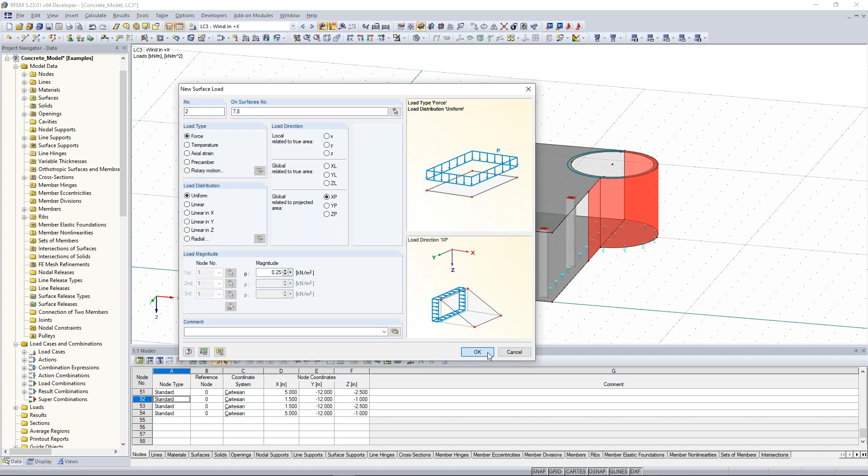And the same thing we are going to do for the right side. Here I choose again these two surfaces, click again on new surface load, and I relate to my projected area. For the suction side we have a lower value, in that case 0.25. And I click these two lines, create a line load, and enter a value of 0.41.

Okay, good. Now I jump to the next load case, the positive Y direction. For that I select all three surfaces here, click on new surface load, relate also to the projected area. For the pressure side we have a value of 0.4 kilonewton per square meter. Now I refer to these lines here, new line load, and also here 0.65 kilonewton per meter.

So now I made a mistake. The direction of the wind load is wrong. I click again on these two line loads, right click, edit line load. The direction of these line loads was wrong. I refer to related to true line length in the Y direction. Now it's right. So you see, it's no problem when you make some mistakes in the modeling or load entering; you can change it every time afterwards.

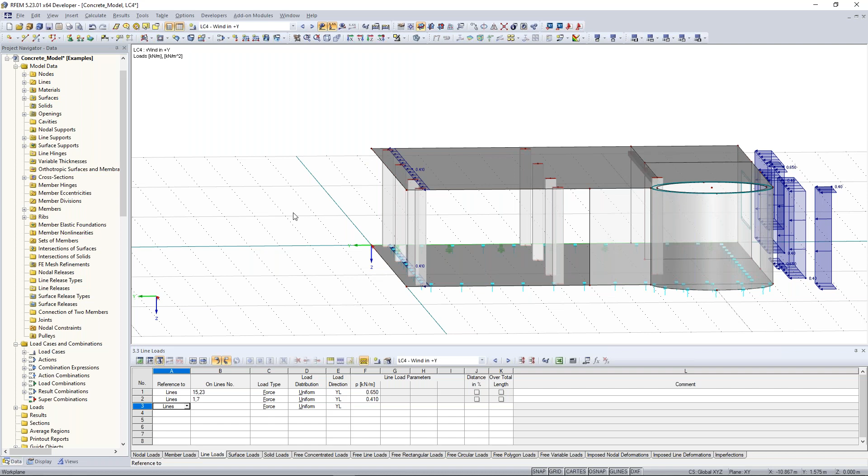So for the suction side, we create now this line load. We refer to lines and choose the lines graphically. Click this line and this line. Click on OK. Now the load direction and the load distribution is the same. The only thing we have to do is enter the right value, and for the suction side we have 0.41 kilonewton per meter. And you see we have now a line load. Very easy. Good.

Now, next thing, the insert of imperfections. First of all, I refer to my imperfection towards the positive X direction. In order to filter something, I can really recommend you to work with the Views Navigator. Click on the Views Navigator, and now you just want to see all columns. You can select every column and then say, show me the visibility by selected objects. This is one possibility, but there's an option where you can do it much faster.

Go to visibilities, activate members by cross-section, and activate just the rectangle 350-350. And now you see everything is shown by this visibility of these rectangles. Now you can easily select these columns.

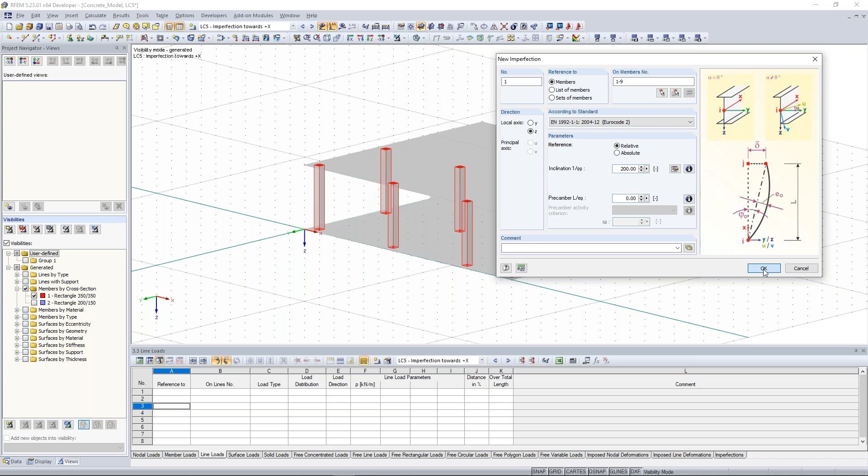You can activate the local axis of members by right-clicking on one of the members and selecting Local Axis. Now you see also the imperfection. I changed the visibility, the display model. Now we have this wireframe, and you see the imperfections a little bit better.

We do the same thing for load case 6, the imperfection of Y. Again, we select everything, click on Insert, Loads, Imperfections graphically, but in that case we refer the direction to Y. Click on OK, and we have here this imperfection.

Okay, good. Now almost everything is done. Let's refer a little bit to the FE mesh. In order to set some FE meshes, we learned in the first online training that we have here in the menu bar the possibility to do some FE mesh settings. Click on that.

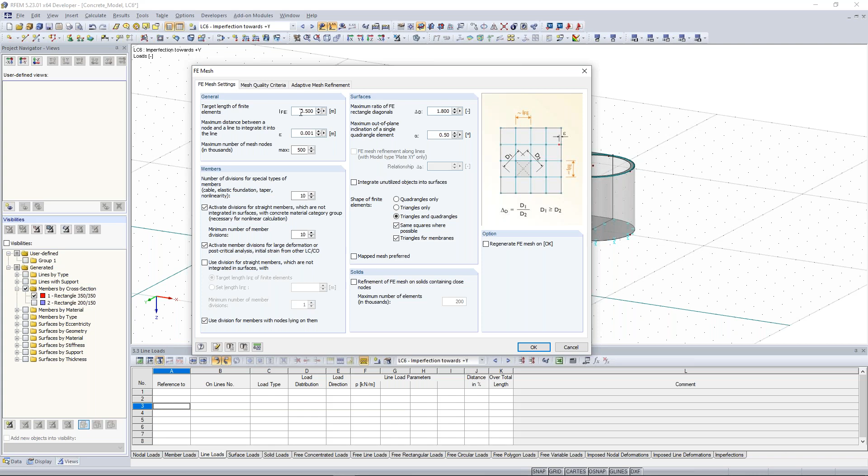Here we see the general target lengths of finite elements. It's okay when you use here 0.5 meters. You have to adapt this length of finite elements every time to your whole model. When you're modeling or designing joints with the help of FEM, you have to adapt the target length of finite elements and choose maybe a lower value, a finer mesh. It's up to you how to use that. I can really recommend leaving it like that, because the presettings are really good. Click on OK.

Now I want to create an FE mesh refinement here at that node, because sometimes the FE mesh should be modified in specific parts of the model. Those are critical areas such as corners of openings.

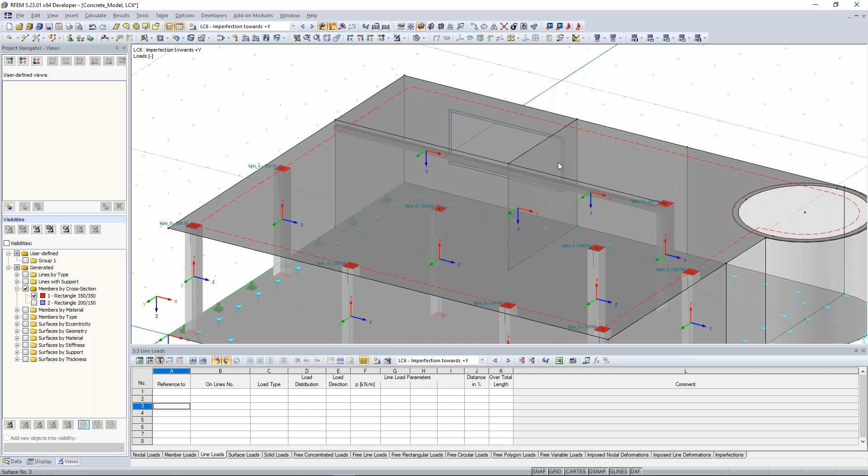For example here, we have corners of openings, or also areas with single loads, because there can be singularities there. And you want to avoid singularities as good as possible, because singularities are parts of a structure where you don't have good results.

For example, we make here an FE mesh refinement. Click on that node, right click, FE mesh refinement, and click New. Create a new FE mesh refinement and apply it to a node, circular. The radius should be 1.5 meters, and the inner and outer length of this FE mesh refinement should be 0.1 meter and 0.5 meter. Click on OK, click again on OK.

Now you see here this sphere or circle lines. And when I show the FE mesh, go to Calculate, click on Generate FE Mesh. And now, in order to see it a little bit better, click here to the wireframe. You see here the FE mesh generation.

The normal target FE length is 0.5 meter, which we set in the general FE mesh settings. And when we use the FE mesh refinement, you see here we made an FE mesh refinement, and the inner length is 0.1 meter, and it becomes bigger and bigger up to 0.5. It's up to you how to do that.

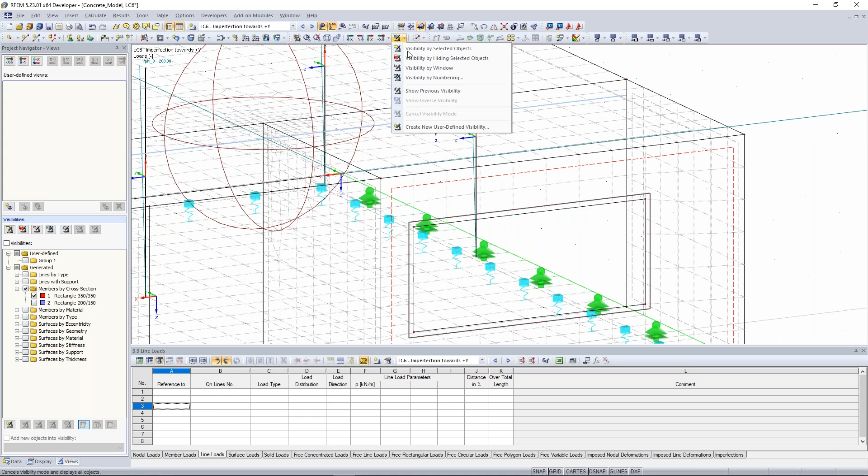For example, I learned it in that way that at least you need 4 FE elements in order to have good results at this surface. So when you want to interpret some internal forces or results, I don't know if 2 FE elements are enough to get good results.

It's up to you. So again, here at the corners, you will probably get singularities, because here you have just one FE element, and along one FE element the results are calculated. I don't know if you get good results there. So my recommendation would be that you do some FE mesh refinements.

Okay, good, so I cancel the visibility mode. Now everything is considered, in my opinion, and I can calculate the whole structure now. I go to Calculate, and I choose here the result combination, which is much faster than calculating every single load case and load combination. Click on OK, and the whole structure calculates.

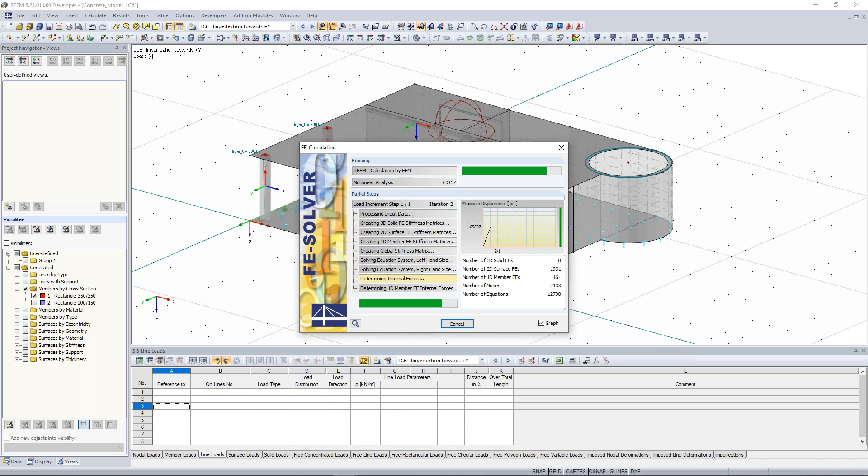Okay, now let's show the results. I jump to the result combination and click here on show results. The first thing we see is the deformation.

I think the deformation looks really nice, interesting. You have the possibility to see the deformation of the surfaces and also of the columns here. You see now we have this line deformation of the columns, of this member.

Go to the display navigator, activate deformation results, deformation cross-section colored, and you see here also the deformation of the cross sections.

Okay good. Next thing, members, the internal forces. Let's go to the downstand beam and compare the results.

These results look very good. So we have here field moments, also this negative moment above over this wall. By the plausibility check, I think this is okay.

Again, the normal forces of the columns - normal forces are pretty clear. Okay good, so now let's go to the surface forces.

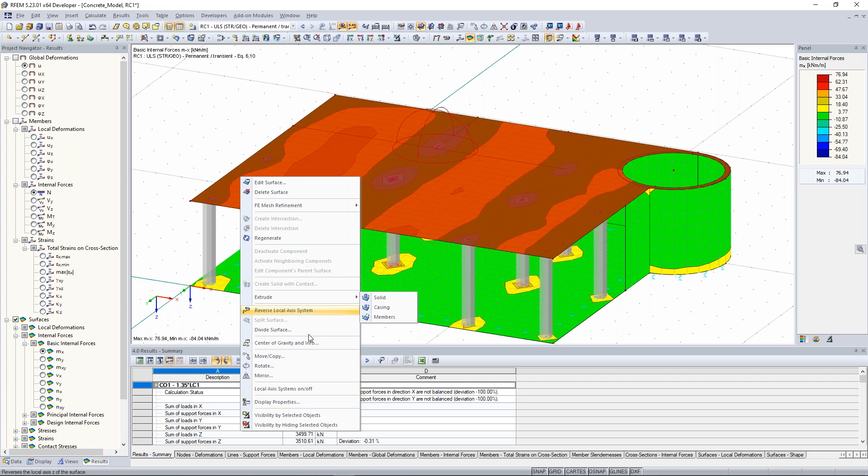You have here the y direction and here the x direction. When I show the mx, basic internal forces, it is along the local x direction of this surface here. I think that's pretty clear.

Here we have these bending moments. Here's the columns, we have these negative moments. So I think that's pretty clear.

You can make a section. Go here, new section numerical, or create section through surface graphically. You can do that and then watch these results.

I create this section here at the data navigator, scroll down to sections, right click, new section.

Give it a name, AA, and choose the right nodes I want to have. In that case, I refer just from one column to the other end column.

The section on surface, or the projection direction, should be the global Z direction. And I refer just to that surface, not the other surface, because the bending moments are a little bit different. Click on OK.

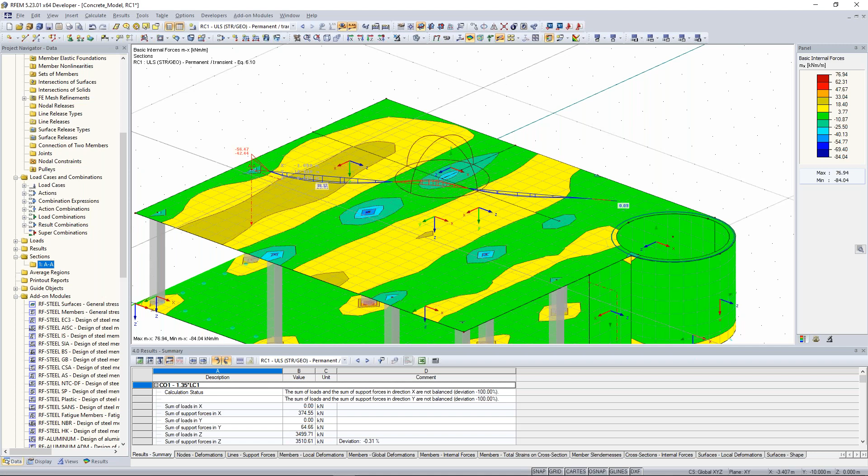So I add this, set the section again right - should be this kind. Now it should be right.

This will take some time. Okay, now I have the right nodes, and you see here the bending moment.

Good, and also some other internal forces, my and so on. Good, now next thing is maybe also important, the contact stresses.

Contact stresses appear at the bottom surface because there we have soil stresses. Here we have these contact stresses, and especially at the areas where the columns are, there we have very high contact stresses. I think that's pretty clear.

Also you can show the support reactions, so you will see here at the line supports this support reaction. When you want to have this distribution of the line supports, just go to the display, go to the results.

Support reactions, and say smooth distribution, and then you see here this distribution support reaction. Good.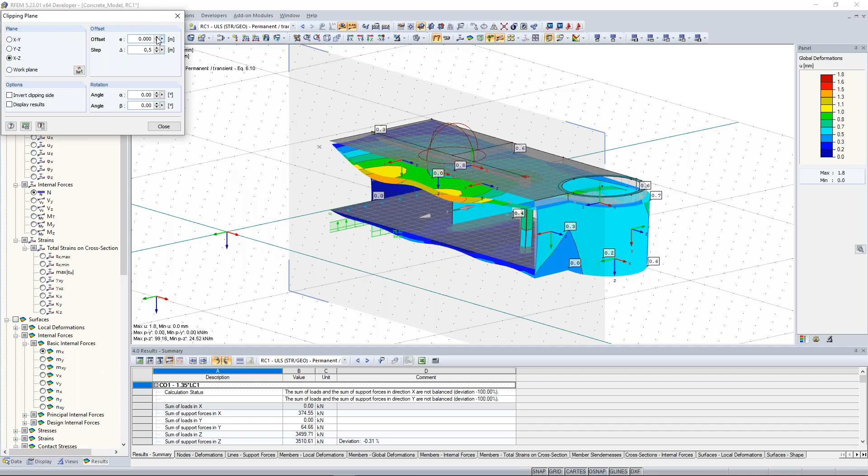First of all, the clipping tool - you can cut the plane, set a step of 0.5 for example, and then you can choose here this offset, also choose the right plane, and so on.

And then you see also every time the different values there. It's very helpful.

You can also rotate the angle a little bit. It's up to you how to do that.

Okay, good, this is maybe a nice feature. And one of my favorite features is when you want to impress someone, maybe your colleague next to you, and you want to say, look what I have for a nice structure, click the Shift button and the F button.

Then it will activate the flying mode, and you can fly around the whole structure or the whole building. With the help of the arrow keys on your keyboard, you can fly around. With your mouse, you move your camera. With the up and down keys, you can jump to the next level, and so on. If you want to increase the speed of this flying mode, just click the plus and minus keys on the keyboard and it becomes faster.

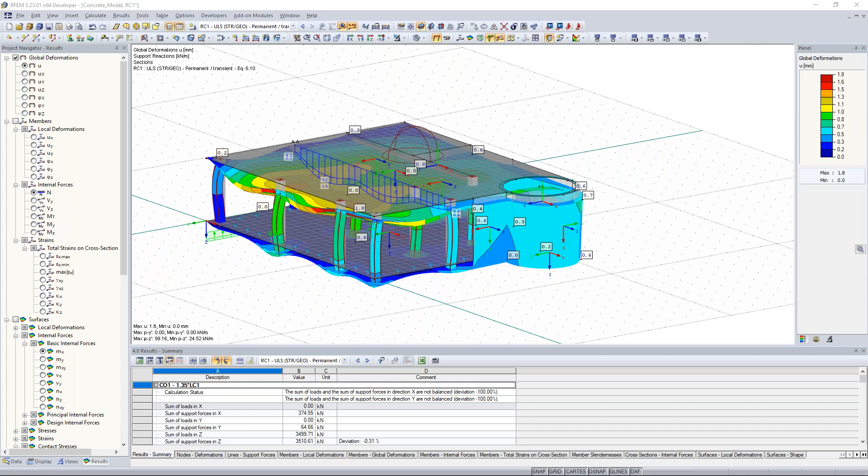Okay, could you show how to set a local coordinate system? Could you show how to set a local coordinate system? Of course, that's no problem. In order to set a local coordinate system, you can go here with right click, open the context menu, and go here to coordinate system. There you have the possibility to create a new user-defined coordinate system.

And when I want to refer, maybe I say now to that level here, from there, now from another level, from that level here, okay? I can say, look to these points here, U, V, W, and I can say my first node, so my origin point, should be this node here.

My u-axis, so you see it here, in this case, should be this node. And my other node should be this one. So I created this plane here. Click on OK.

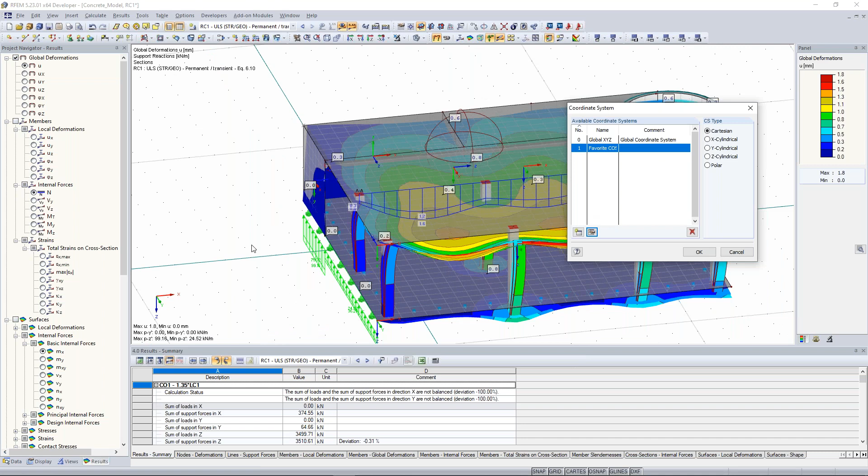Now you can enter a name, let's say 'favorite coordinate system'. Click on OK. And now you see here this user-defined coordinate system. Maybe I deactivate the other coordinates. Okay, this is the way how you can create a new user-defined coordinate system.

Okay, next question please. Is there an add-on to RFEM to design and calculate different ground types? What are ground types? I don't quite understand the question either. Which time? 11:24. Okay, wait a moment. Different ground type. So, is there an add-on to RFEM to design and calculate different ground types? What do you mean exactly by ground type? Could you tell us this question again? During that, I would continue with other questions.

Okay, another question is, what do you mean by imperfection in load cases? So we have the load case imperfection, and just the load case imperfection wouldn't cause any internal forces. But in combination with some other loads, the imperfection would cause additional internal forces. So you have to consider these imperfections every time in load combinations. Yeah.

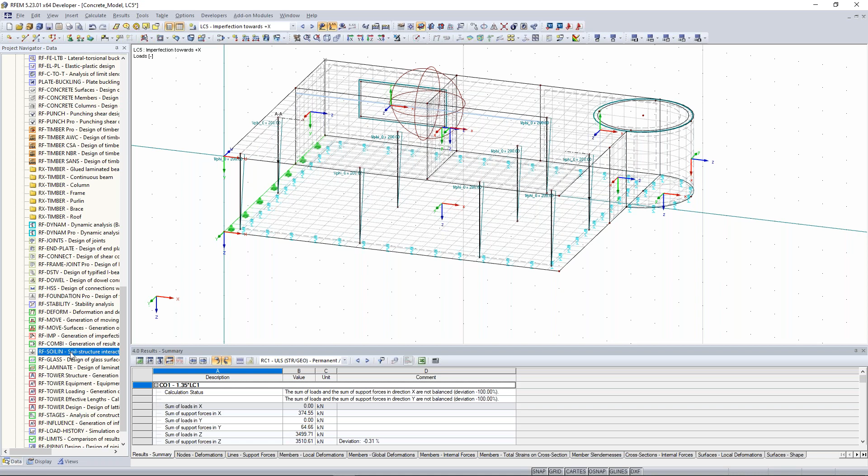There are, in my opinion, different calculation methods concerning the right ground analysis, so the right ground. Consider that the ground is a philosophy topic in itself. There are different ways to do that, different methods. Yeah, there are different ways to consider that.

Good. Next question. Okay, that's a long one. While discussing the result options in the internal forces, you said mx is mentioned with respect to local axis, but in the model we have x-axis oriented differently with respect to different surfaces. How to interpret this result? This question is at 11:59, Daniel.

Okay. Wait a moment, I go back to my right work plane. So you have to distinguish between the local axis of this member and the global coordinate system. And the results of these members refer every time to the local axis of the surface.

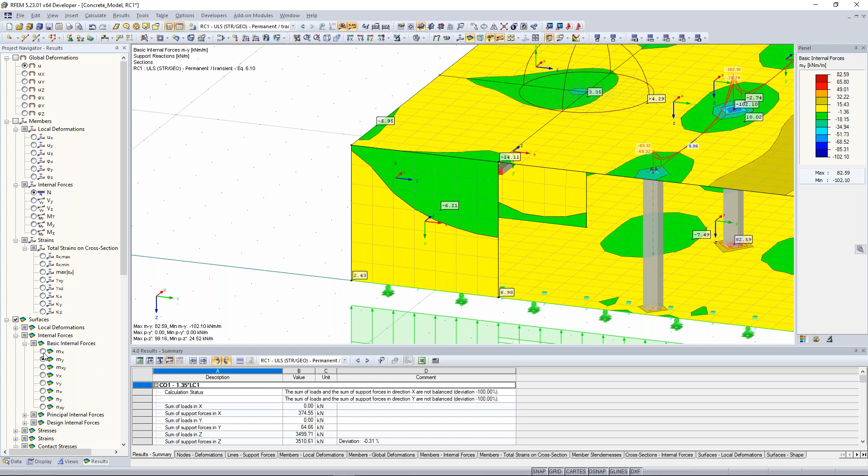So when we look maybe at one of the walls here, mx and my, I think that's pretty clear that we don't have so much bending moment there. But when you look at ny, there we now have some normal forces in that wall. So please keep that in mind. These basic internal forces mx and my refer every time to the local axis of the surface.

Okay. Next question. Give me a second. Okay, how do you consider eccentricity of loads, for example, in column members? That's a very good question. That's a really, really good question. I have to think about it because I think that's possible because we implemented this function, but I have to look up how to create this.

Maybe Praxitelis, could you look for it? I can look it up and send the link maybe. Yeah. That would be fine. Now I think I have it. Wait a moment. Yeah, okay. Look, now I have it.

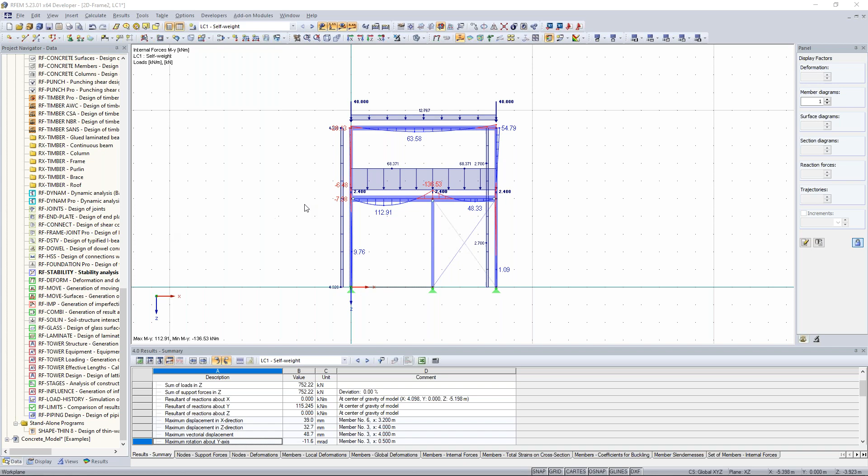Is it possible to have a trapezoidal cross-section shape in the bottom floor? Yeah, you have the possibility to create different cross sections, of course. When you want to create this cross section, use this cross section library. There you will find a lot of cross sections, also some trapezoidal cross sections, like this one here, trapezoidal hollow section. This is possible.

Now I think I know what you mean. Yeah, of course, this is possible here, trapezoidal hollow section, in order to have this as a downstand beam. Yeah, that's possible. Now I know. So you want to create maybe a composite structure. Yeah, this is possible, of course.

Yeah, so you find it here, cross-section library, trapezoidal cross-section, hollow rib section, or also here, trapezoidal hollow section. Yeah, that is possible. Next question.

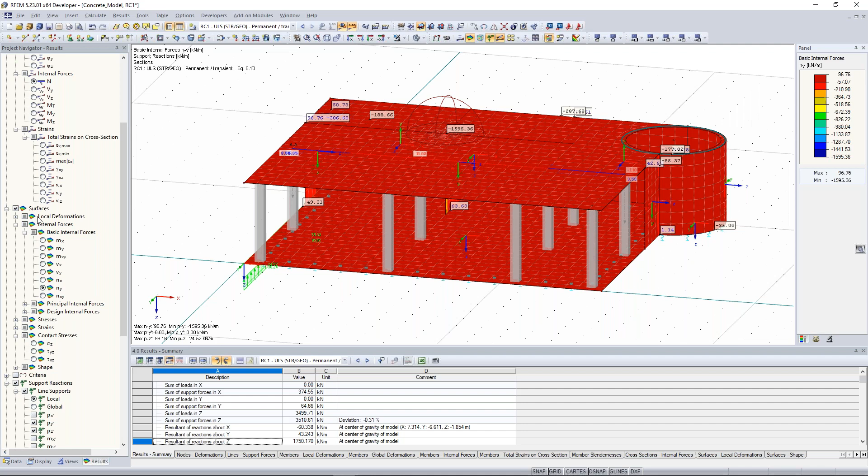Are you going to consider the issue of punching shear between the column and the slab surface? Yeah, of course, there is. You have to consider these things. You can see the values here. So when I look to the results, go to the basic internal forces. I think that's pretty clear.

And when you want to design this in consideration of the punching shear, you can use one of our add-on modules. And this is RF-PUNCH Pro. Yeah, and there you consider the punching shear design of surfaces and consider these forces within these columns here. Maybe design internal forces would be, yeah. But you have to activate or use this RF-PUNCH Pro add-on. Yeah.

Good. Next question. The next is if you could show some options related to documentation of results. Yeah, of course. But this will take a little bit longer. So when I want to transfer some results or some information about the whole structure, you can create a printout report. Click here on print graphic, please use this mass print. This is very helpful for creating several documents and pictures. Click here on mass print settings.

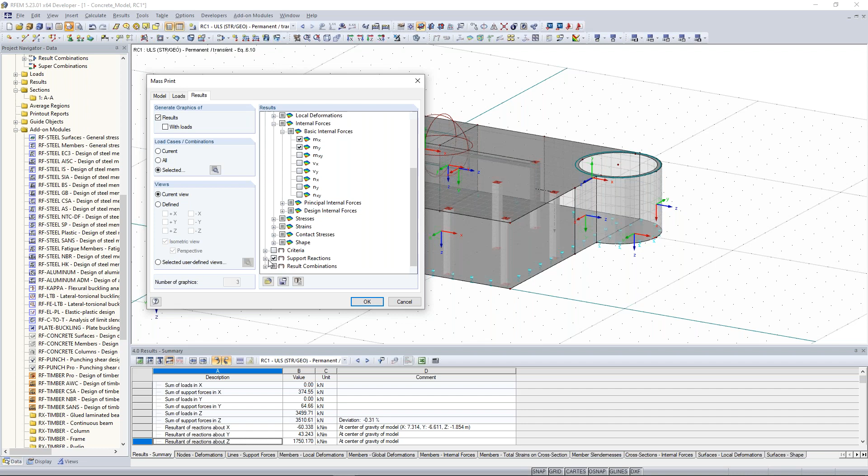Now I have to choose the results I want to show. So in that case, I'm interested in the global deformation maybe, and basic internal forces, and maybe also the principal directions, and maybe also the contact stresses at the bottom plate. Okay, I refer to my current view, click on OK, again on OK. Then I click on OK, and then the printout report will be opened.

Now I have on the left side this printout report navigator, a big overview about the model information, and here also the generated model. When you don't like this picture or this image, just right-click, say edit, and change that. So in that case, I don't want to see the FE mesh refinement, so I deactivate it, and I deactivate also the FE mesh. And then I can say okay, go back. And now you have it here like that.

When you go to the chapter of loads, you see here the different images of the loading and their load cases. Takes some time. Yeah, very helpful. Here again, the wind and also the different results we created. Okay. Good. This is maybe one way to do a printout report. Next question maybe.

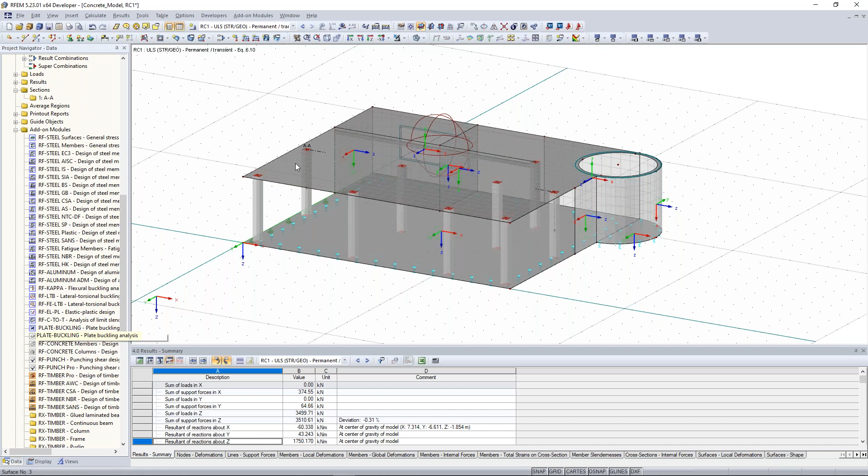Does RF-STABILITY also take into consideration reinforcement layouts if one uses this tool for RC structures? It's a good question. It's a really good question. Because normally, in order to calculate concrete structures with the reinforcements, you get a stiffer cross-section, stiffer surfaces, and so on. You have to use one of our add-on modules. For surfaces, please use RF-CONCRETE Surfaces. For members, please use CONCRETE Members and also CONCRETE Columns.

And normally, RF-STABILITY should consider these cross-section properties, especially the stiffness, also of the reinforced column, for example. This should be normally possible. But in my opinion, I don't think it makes a big difference when you have a little bit stiffer structure. But when you want to consider concrete design or reinforcements, you have to use one of our add-on modules.

So click here on RF-CONCRETE Surfaces or CONCRETE Members in order to design these members here, in order to consider reinforcements in the column, for example. And then you can do again an RF-STABILITY analysis in order to get your critical load factors, in order to see where the critical points of the whole structure are.

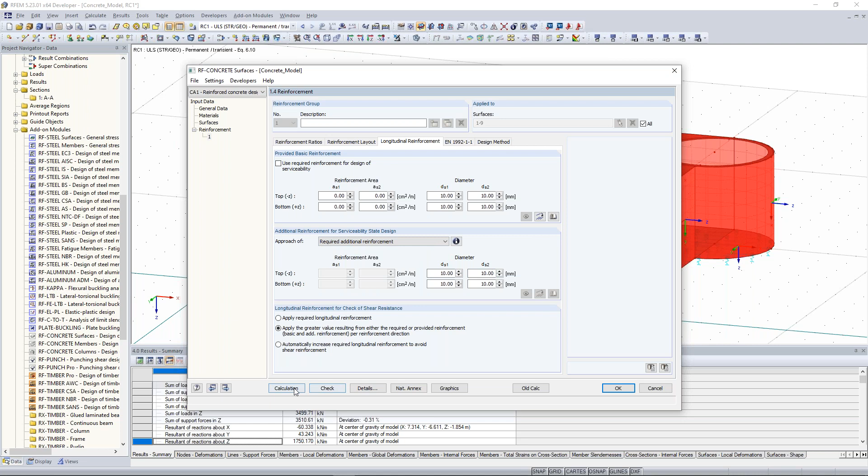And then you can calculate it. Also, you can use the diameter and so many other things. And then you can calculate it, and then you will see the different results. I don't know if it's right now and so on. But you see it calculates a long time, so I cancel this. But here you can preset everything.